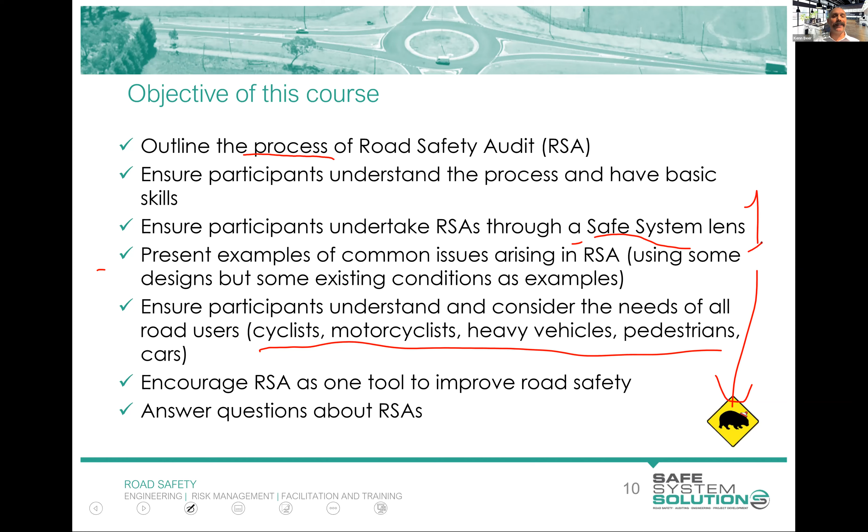The road safety audit process really follows the Austroads Guide to Road Safety Part 6 and 6A, which set out the process for managing road safety audits (Part 6) and the implementation of road safety audits (Part 6A). Those documents are currently being updated. I'm acting as a technical advisor to Austroads on that update to consolidate them into one, and I'll give you some insights into things coming in that future document, which should be released later this calendar year, hopefully, although Austroads board approval tends to be notoriously slow.

New Zealand has this document, a 2013 document, Road Safety Audit Procedures for Projects. There's a lot of similarity between these two. There are some differences - some New Zealand practices have been fed into the new updated Austroads Guide, and there will be some differences. It'll be up to New Zealand to decide whether you adopt the new Part 6 in its entirety, or create a supplement with your own practices mentioning specific aspects you want to do differently. Those are the old Austroads guides, which you may recognise.

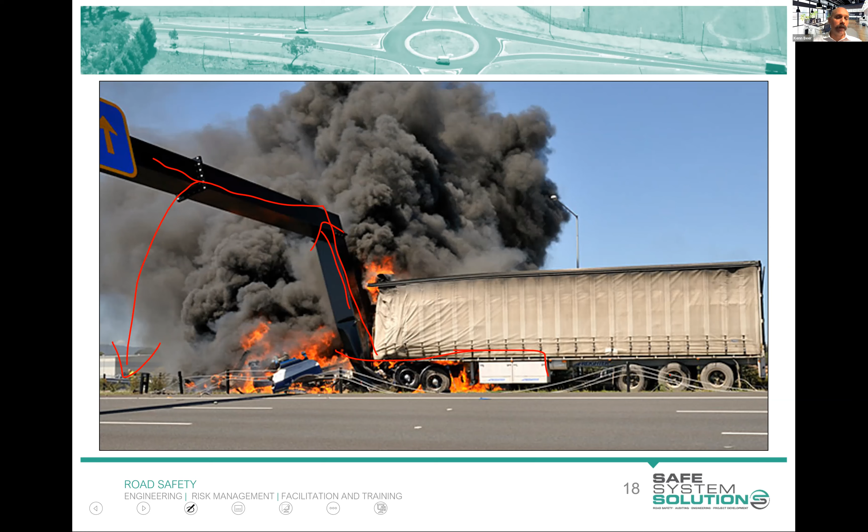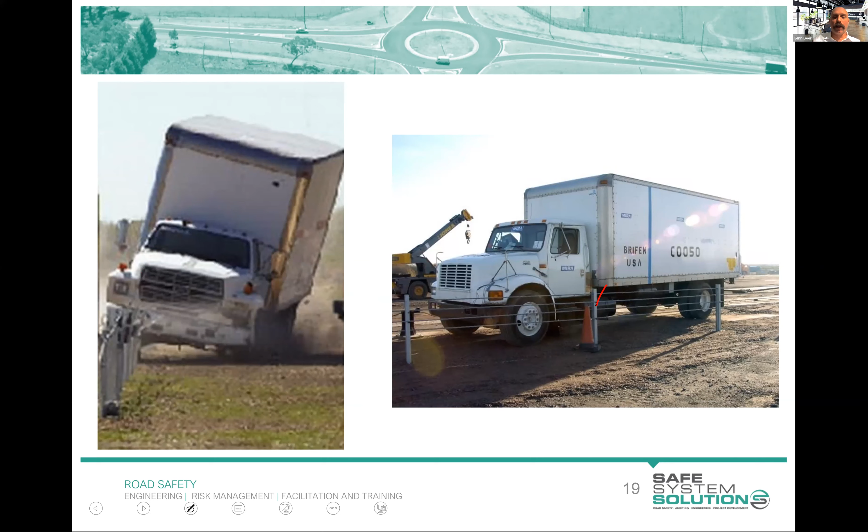Before I get you involved in a few other questions and polls, I want to run through another classic example of a road safety audit issue that would pop up. That last one - there's lots of stuff associated with road safety barriers if you're doing a barrier job, and many of you will know there are so many technical elements to road safety barriers. Auditors do delve into that a bit more than you would with a safe system assessment, where you're looking more at a higher level at everything.

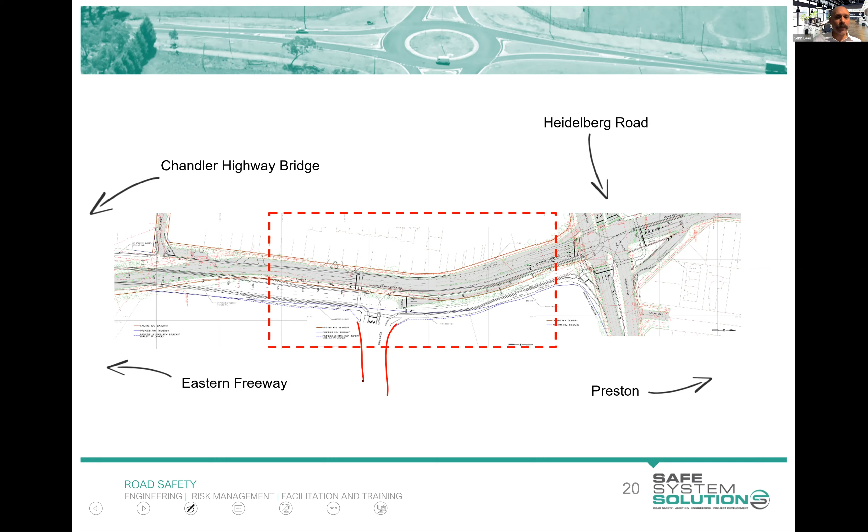Let's have a look at this one, which I would say is a classic road safety audit finding. We've got a design here for a new bit of road - a brownfield site. There's existing road there, there's a big new development coming in, a massive new development, there's some upgrades to this existing intersection, and it's all linking together. Here's the access to the new huge subdivision, and then it links up to this new intersection up here.

I sometimes marvel at people's ability to name some of these things. Trap lane - it's just such a great name to explain exactly what happens. You are trapped. You're driving along, you find yourself trapped, and maneuvers need to be made. We know if you have a trap lane, as a driver approaches it, they are going to make high-risk maneuvers to get out of their lane. Obviously they don't want to stop, and we know there's an increase in turbulence and an increase in crashes - a lot of sideswipe rear-end crashes, which can happen at higher speeds. But motorcyclists are involved in this too.

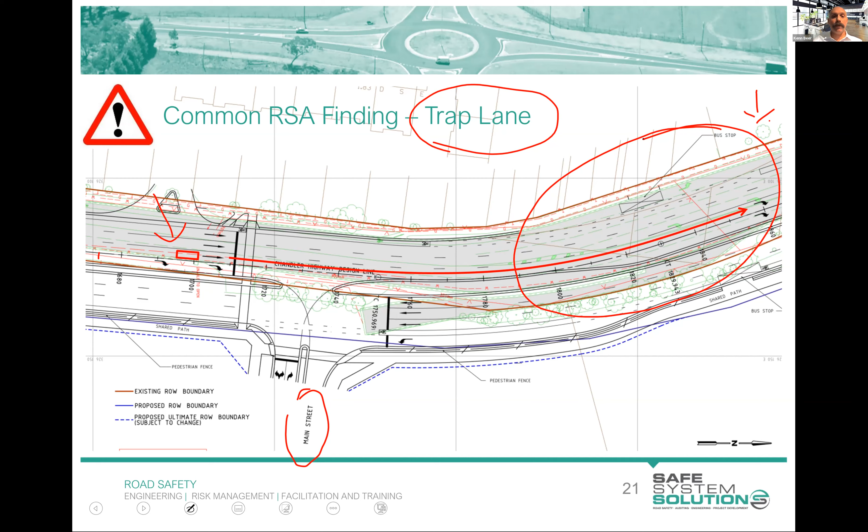So let's do a little exercise now, and I'm going to play a video, and hopefully it streams well for you. It might stream a little bit slow, but it's of a crash. I'm going to be asking you to identify characteristics of the road environment that you believe may have contributed to this crash.

Now, Kathy, hopefully that streamed through for you. Let me know if it streamed through. It was all good. Okay.

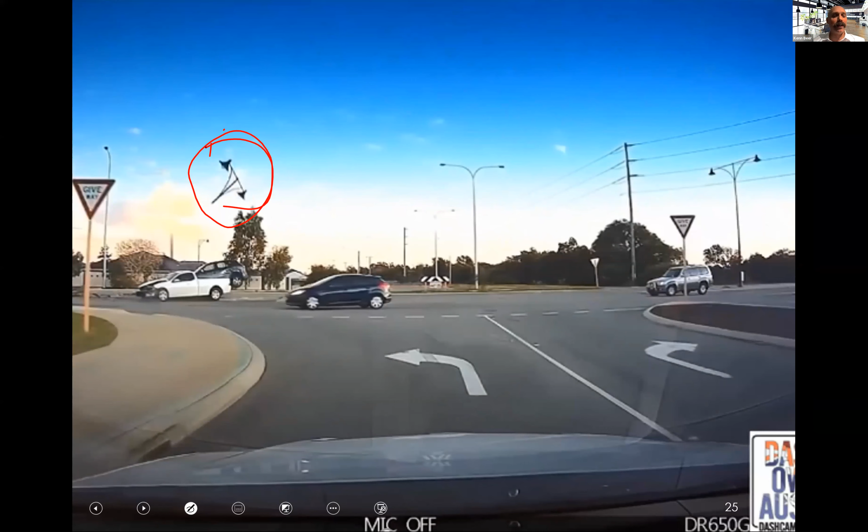I tell you what, though, I've never seen a slip-based pole where the light head separates like that. I'd be interested if anybody else has. It's quite a fascinating one.

Anyway, so the decision to utilize a frangible slip-based pole in this particular scenario, I think, has probably saved the life, if not prevented a serious injury, of the black car driver there, who was just driving along and then all of a sudden was involved in an incident. So that choice to use that means it's got that extra deflection space there.

And it's surprising how small a distance, if you can add that energy absorption or dissipation of energy over time, can change it from a fatality, high-level serious injury, into a walk-away event—which this one, if you watch a little bit of the footage after, you see that actually they get out there.

So a road safety auditor also has to think about severity of crashes. We don't just stop at likelihood, we do the severity as well. So another example here where maybe a road safety auditor has been involved and made the recommendation to use a slip-based pole.

So likelihood and severity, again, are key elements to thinking through the road safety audit process.

So let's talk about slip-based poles. A slip-based pole, I'm sure this group is very experienced with, though some doing this course in the future may be new to it. It's the idea that it shears at the base, where it has the collar and the bolts to manage wind loads from a torque perspective. As a road safety auditor, you'd be looking at roadside lighting installations and saying, well, could this be made slip-based to lessen the severity of any crash?

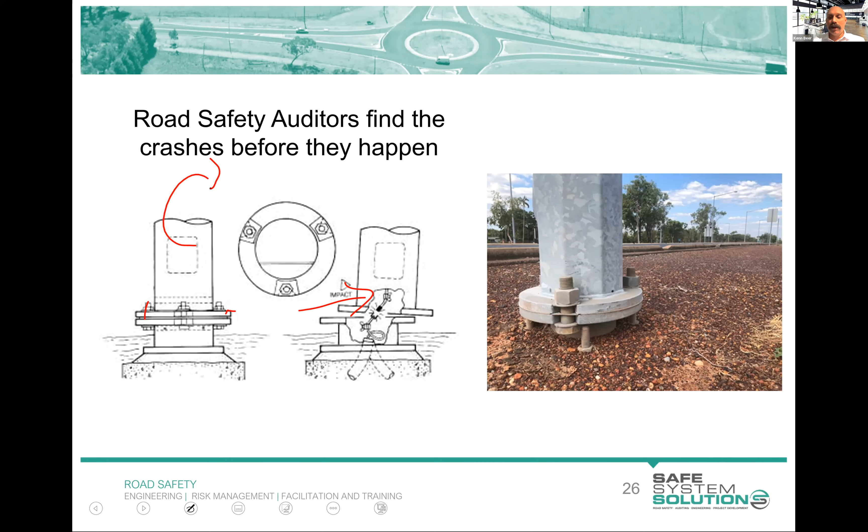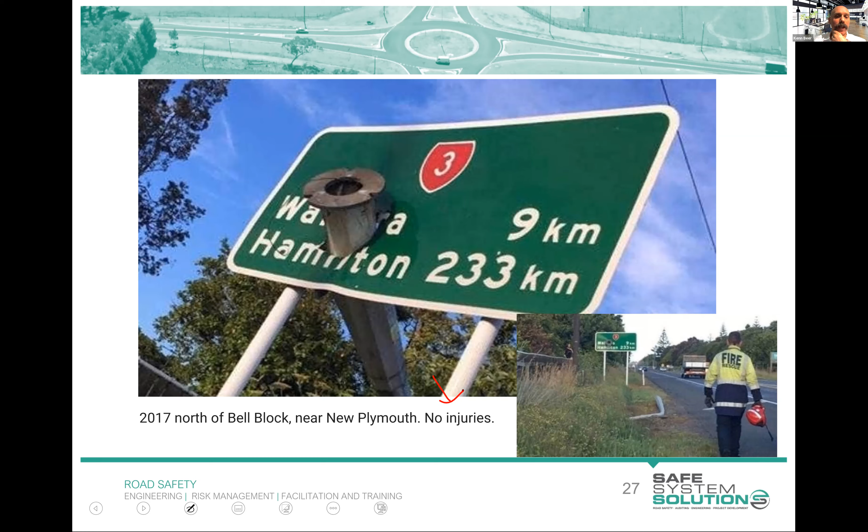So that shows the advantage of using slip-based poles when we can. But as a road safety auditor, you've got more to do than just suggest slip-based poles everywhere. You have to contextually think about this and understand how it's going to function if struck. What are some of the challenges with it? Are they using the right post, the right pole for the right location?

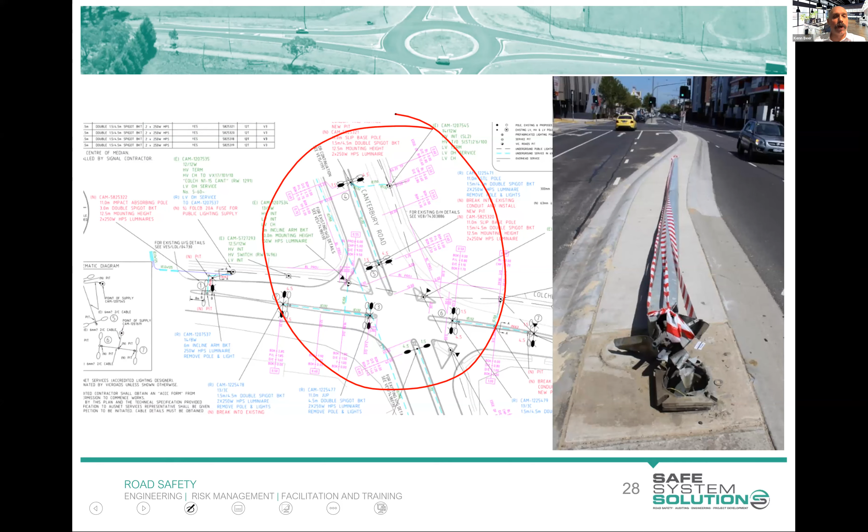So let's have a look at this one here. Hypothetically, if it is the same location, it's not quite the same pole. But if you were back at the design stage, seeing lots of lighting columns and poles in this big new major intersection upgrade, and they said we're going to make this a slip-based pole, as a road safety auditor you'd say, well, that's good - they're trying to make it safe and friendly. But what issues may this arise that you'd want to put into your report? Any ideas on that?

Okay, yes, they're all coming in now. I'll let Kathy work that out, because the flood of people talking about pedestrians and vulnerable road users is big there, and that's right. We're starting to think about, okay, if this is struck, maybe even at lowish speeds, we're going to have a large hazard falling into areas where there's pedestrians, cyclists, and also overhead wires - lots of overhead wires here.

So as an auditor, you need to think through all of these things. Where is it? When it's struck, where's it going to go? Is it more dangerous to have it slip-based rather than rigid, or even an impact-absorbing pole, which holds a more contained envelope when struck and is usually the preferred frangible light pole in a lower speed environment? Lower speed is generally seen as anything below 80 kilometers per hour in a lot of your standards and guidelines. 80 is very fast, as many of you know, and there's a lot of energy in there, but generally speaking.

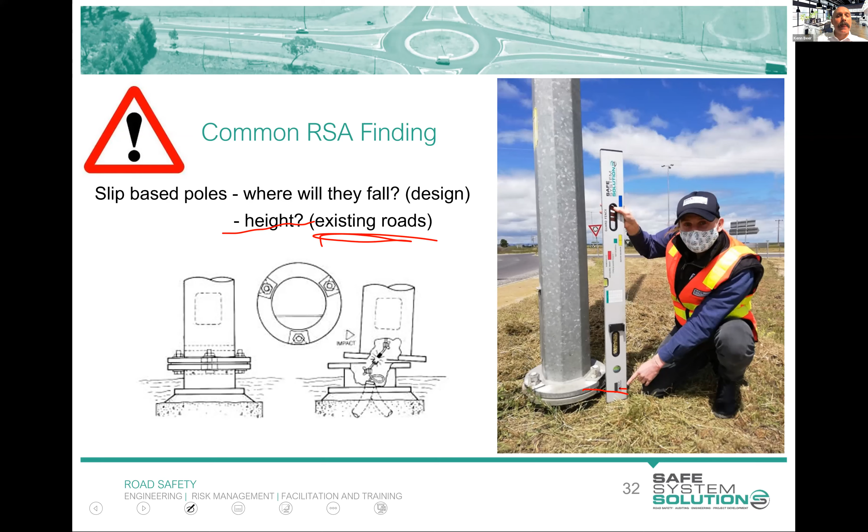So road safety audit is proactive. It is the proactive process. Black spot investigation, crash reduction study - I think was the term I was looking for in New Zealand - is sort of the black spot investigation, crash reduction study, road safety assessment, or whatever it is the reactive process.

Now the question sort of comes: should you look at crash history as part of your road safety audit? And there is no specific advice. In fact, your New Zealand procedure for road safety audits does mention crash history as something you could take into account more in the determination of your likelihood of crashes, but certainly it is identified.

A lot of road safety auditors will say they don't like to look at crash history because this is a new facility being built. It's a design, it's a major alteration to the infrastructure. And the history of it is somewhat irrelevant, and it may cloud your thinking broadly about potential future issues.

So I'm not going to say you must look at the crash history or you must not look at the crash history. I'm going to leave that to you. If you think it's going to be valuable in building a rounded picture of what's to come, then please do so. If you think it will help you risk rate things, please have a look at it. If you're worried about it clouding your judgment, you can maybe put it to a side, or maybe look at it after you've done a bit of thinking about the project.

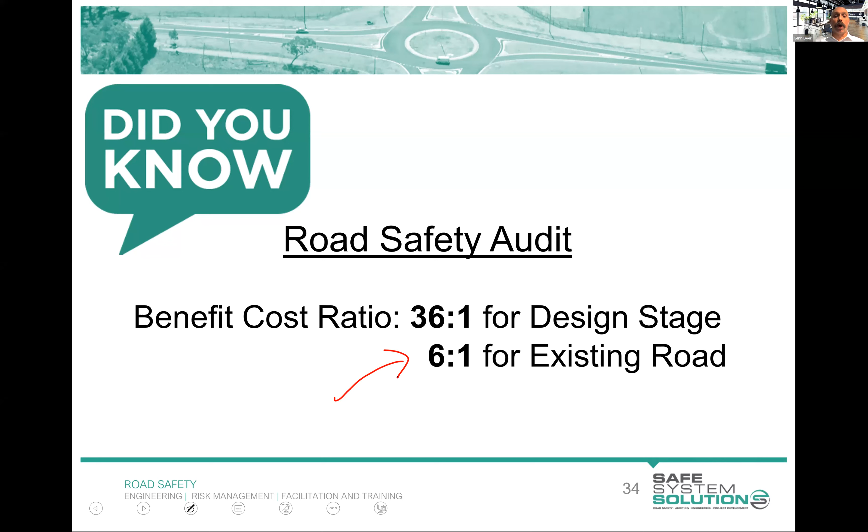Okay, definition of a road safety audit. I'm going to run through this for what the Austroads definition is, then show you what the New Zealand one is. They're pretty much the same, but there's some slight differences.

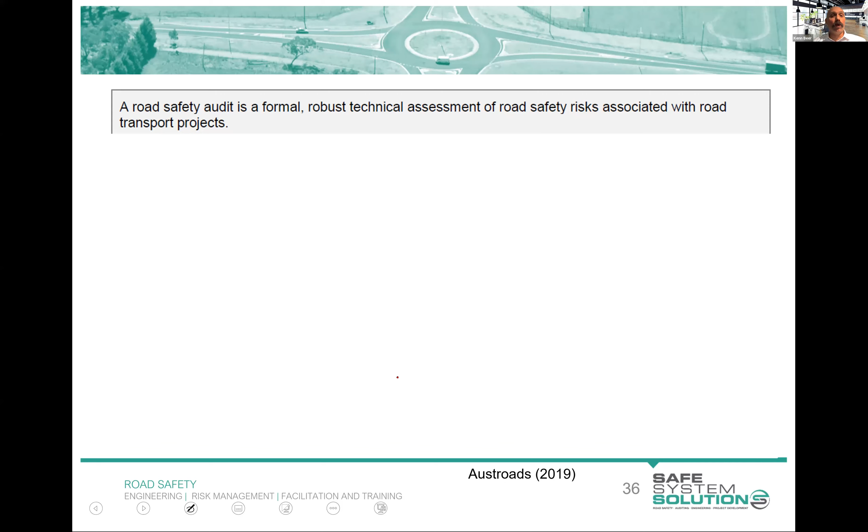Austroads has come up with this lengthy, wordy definition of a road safety audit: a formal, robust technical assessment of road safety risk associated with road transport projects, completed by independent and qualified audit teams, applying safe system principles and targeting fatal and serious injury crashes. It considers the safety of all road users, unless specified in the audit brief, which I'll come back to.

Actually, that one is a potential trip-up point for the quiz at the end, because we always say you should consider every road user within a road safety audit. But there are some briefs which specify a particular road user as a focal point, though you still wouldn't ignore other road users. So when you get to that question, really think: we've got to consider every road user here.

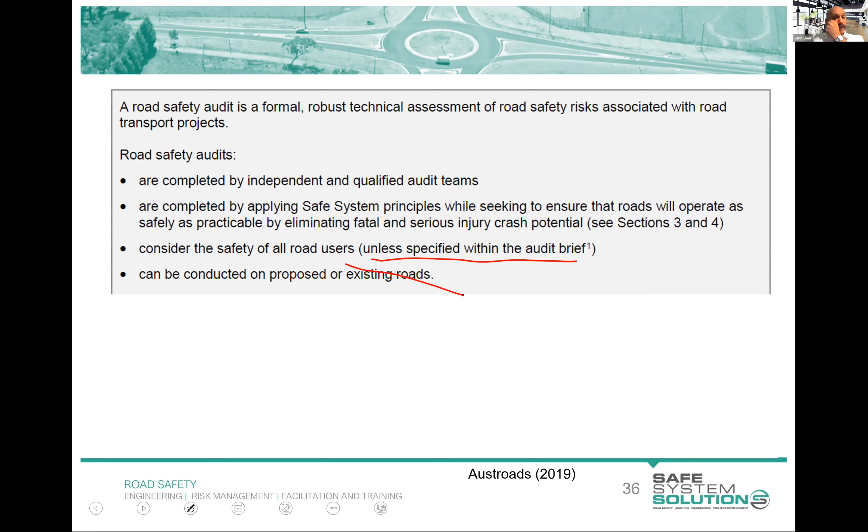And it can be conducted on proposed or existing roads. Again, this is one where New Zealand will say, no, that's another process. Then there's this extra statement added into the Austroads definition.

The objective of a road safety audit is to identify foreseeable hazards for road users. It's a reasonable but not absolute hazard identification method for all road users, with a particular focus on reducing fatal and serious injury crashes. A road safety audit is not an opportunity to redesign the project without an apparent link to safety. So it's all about safety.

And it's not a technical check against design standards. That sort of work should be carried out as part of quality processes within any design house or design organisation.

So it's formal — I'll highlight that. This is a formal process, and I'm going to take you through all the steps of it. It's not something that just happens at lunchtime, or that you flick over to a colleague saying, hey, can you audit these designs and have it back to me in a couple of hours. There's a process to go through: done by independent and qualified teams, using safe system principles, considering all road users, on proposed or existing roads.

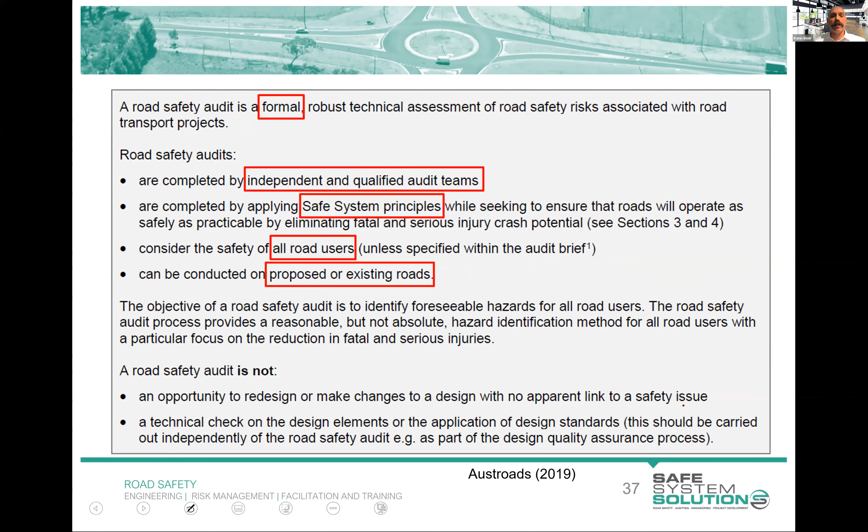The New Zealand definition seems to say it with far fewer words than Austroads — maybe Austroads just likes to elaborate a little too much. It's an independent review of a future road project to identify anything that may affect road safety. The audit team considers the safety of all road users and qualitatively reports on road safety issues and opportunities to improve safety. It's intended to help deliver a safe road system and is not a review of compliance with standards. So a lot of familiar themes there, and I highlighted a few important words.

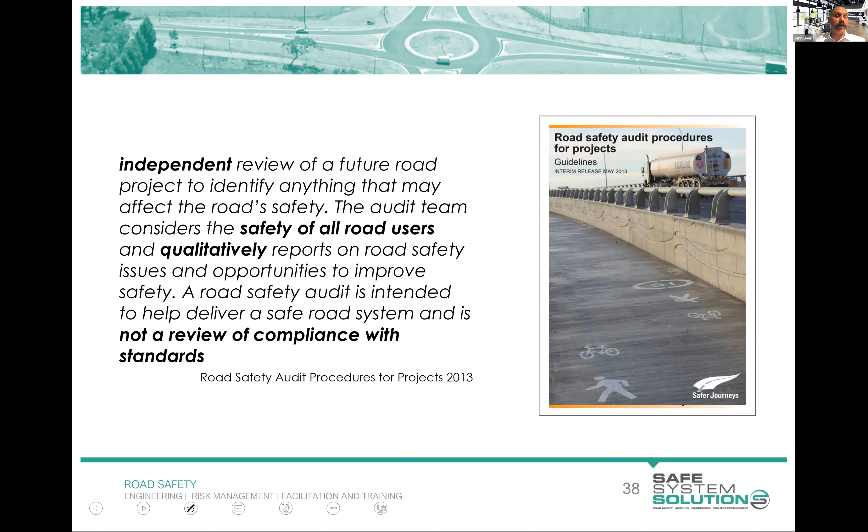The safe system, as I've mentioned, is increasingly factoring into road safety audits, and New Zealand's got an interesting way of forcing that out through the risk assessment methodology used, which we'll go into.

This is the part of the course where I remind people what the safe system is, or introduce them to it for the first time. We do get a lot of people through this course who really aren't aware of the safe system, so I spend longer with a group like that.

But this group has already been through all this, so I don't need to run through all the principles and elements New Zealand is using under the new strategy and framework of the safe system. Still, human tolerance to physical force and the idea that people make mistakes remain critical to it.

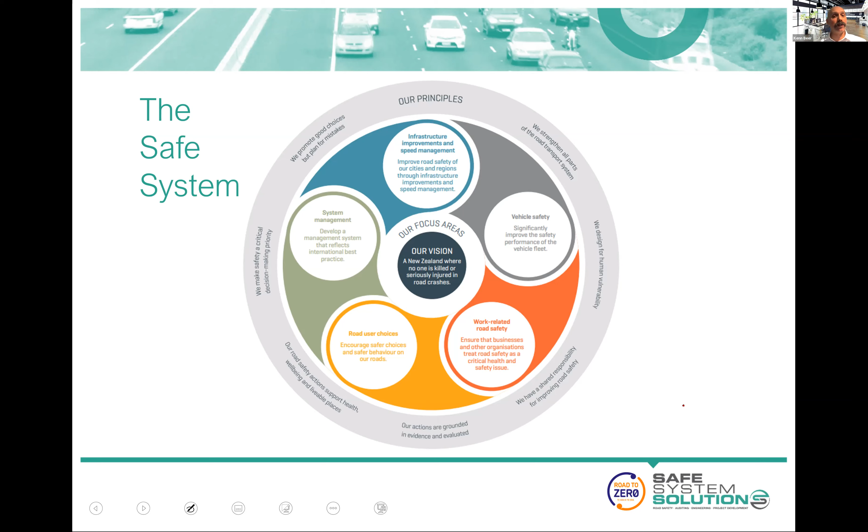Normally I'd run through all the different New Zealand principles being put forward, but really, highlighting designing for human vulnerability is an important one that people can forget in road safety auditing — getting fixated on likelihood factors, but we need to consider vulnerability as well.

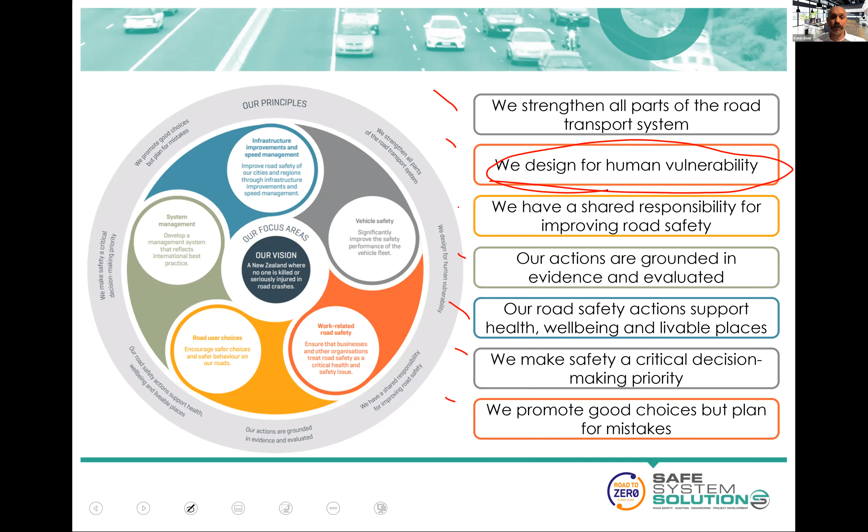We also utilise the biomechanical tolerance forces of the human body, referring back to our curves on speeds and crashes. I know there's lots of work going on recreating more contemporary versions of these with newer vehicles and better data and information, but the Austroads Guide and the New Zealand one still refer to these curves.

It's probably at this point we're going to pop up a little poll. I've asked one of these questions before, but I'll ask it again because it shows what we'd ask a fresh group — it's my way of talking about human tolerance to physical force.

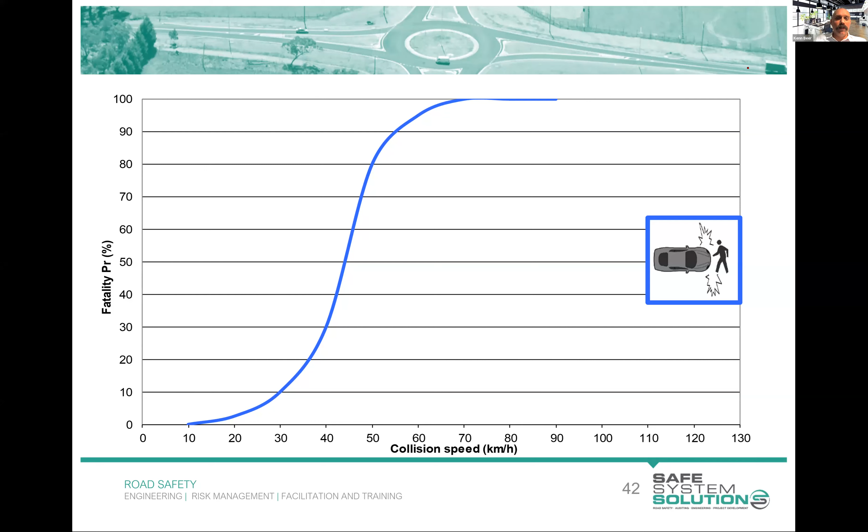Road safety audit, check against standards - no, it's not, well done everybody. And you can audit your own design - well, you can't audit your own design. It has to be that independent check, and most of you are onto that.

So the formal elements of the SAFE system - these are more across Australia these days, New Zealand's sort of drifting away from these pillars, these elements. The idea being that safe attitude's not specifically one of the elements of the SAFE system; it's embedded within safe people, I suppose. And the idea of eliminating mistakes on the road is seen as unachievable - we've got humans in control of the systems, humans make mistakes, so that's not specifically one of the things within the SAFE system.

It's more about minimising and managing mistakes rather than trying to eliminate them. And Usain Bolt was 44 kilometres an hour, as most of you got, and that brings us back to the graphs on biomechanical tolerances to forces. We see the car striking pedestrian graph here, and this is where, as you remember from the last course, we have Usain Bolt coming in at around 44 kilometres per hour in the collision speed down the bottom here. For the general population, we're seeing that level is about 60% chance of death if a car was to strike a pedestrian.

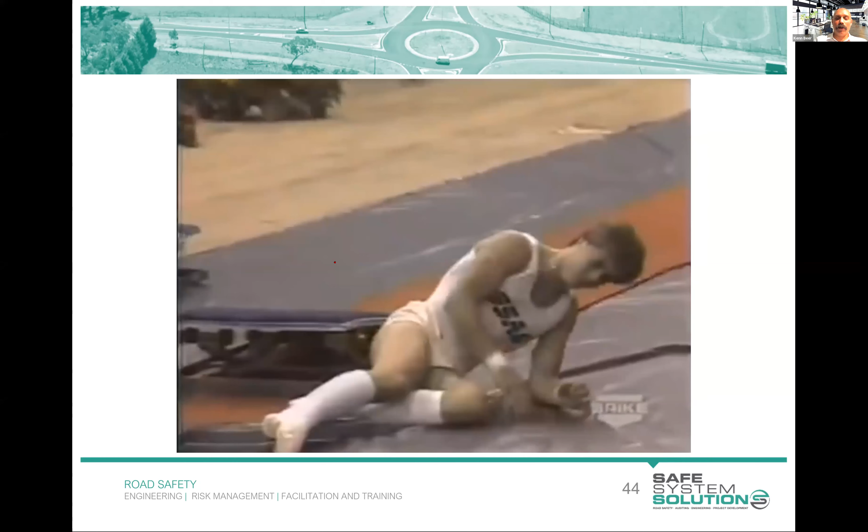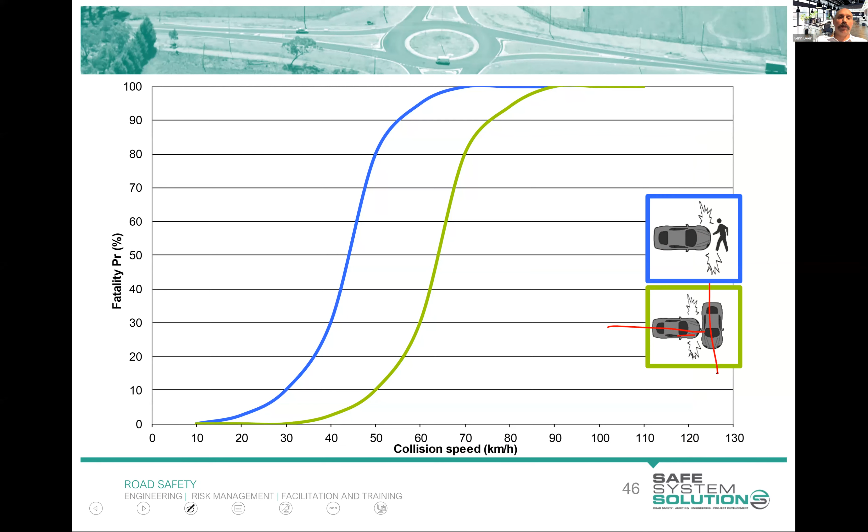So when we put speeds higher than the human body can handle into different crash forces, we are in trouble. This is the side impact, right angle, bullet vehicle speed here, and again the head-on speed. I would spend a lot more time running through this, talking about the biomechanical tolerances of the human body, what this means, where there's exponential kick-ups - 30, 50, 70 being the critical speeds for these different crash types. Also talking about other crash types like side swipes, crashes with poles, and the fact that you can dissipate energy over time. You can really start to think about these as vectors and get some understanding of energy transfer to the human.

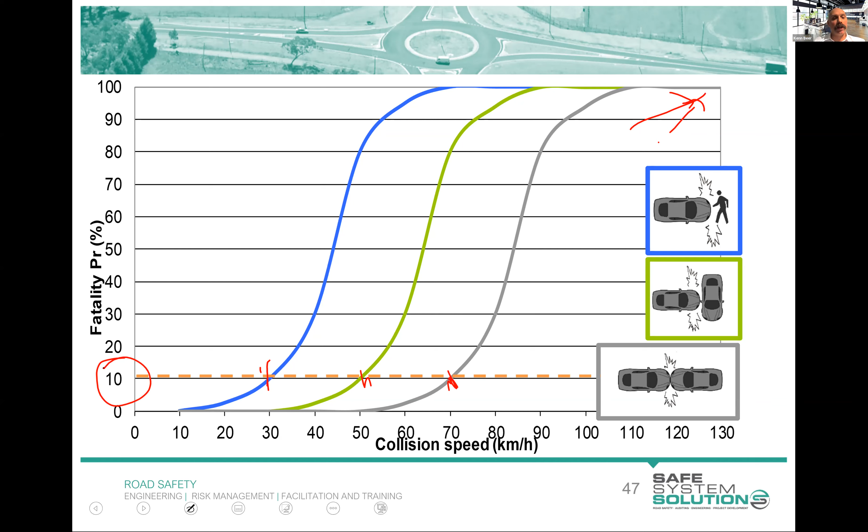The 10% line is still important in our thinking in road safety audits when we're looking into the severity of crashes or the chance that the crash will be highly severe. That gives us a good starting point, and some more speeds and crash types to give us that general idea of the severity and the outcomes of crashes when they occur.

Okay, the old model of road safety audits basically was to identify your issue - so look at the designs, identify the issue, put a risk rating to it, and make some recommendations. There's been a couple of new steps in recent years. The first one is to have a look at the biomechanical tolerances that we just looked at, make some commentary around that.

The next step is to categorize treatments into their effectiveness, similar to how you do in a safe system assessment. Neither of these steps are specified in the New Zealand guidance at the moment. They are in the Austroads guidance, and they'll be even further enhanced in the next version. So that might be an opportunity for New Zealand to take on some of this. Those are some of the elements that pull contemporary road safety audits closer to safe system assessments.

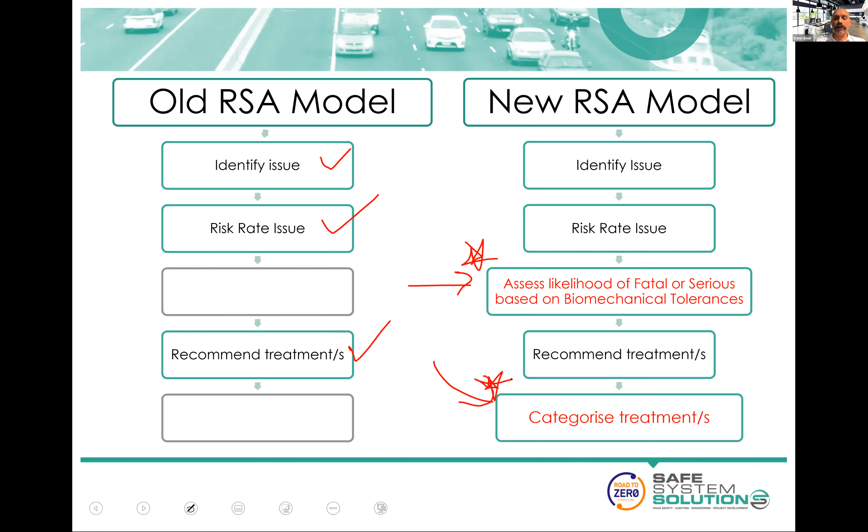So what I want to do is walk you through a road safety audit finding, and really focus on how you present the information to your client. The project team, the designer, said this is what we're planning at this intersection. You're the auditor, part of the audit team, poring over the design, looking at it, and then you found something. How do you present that information?

This is the upgrade of an intersection to install new traffic signals. You can see the green is the new design and the blue is the existing. They're putting in some signal pedestals, a JUMA, depending on how you pronounce it. I don't even know if in New Zealand you'd use that term, but if somebody can tell me what the acronym JUMA stands for, I'll give you a prize. We'll see if anybody comes in with that.

But anyway, you're the auditor, analysing, looking through. Okay, Mark is onto it. Oh, it's a race when many people know the answer — it's who can type quickest. Kathy, I'll let you work that out. I think Mark might have got in first, but John may have been close behind as well. It says joint use mast arm — that's where you put your signals and your lighting pole on the same pole.

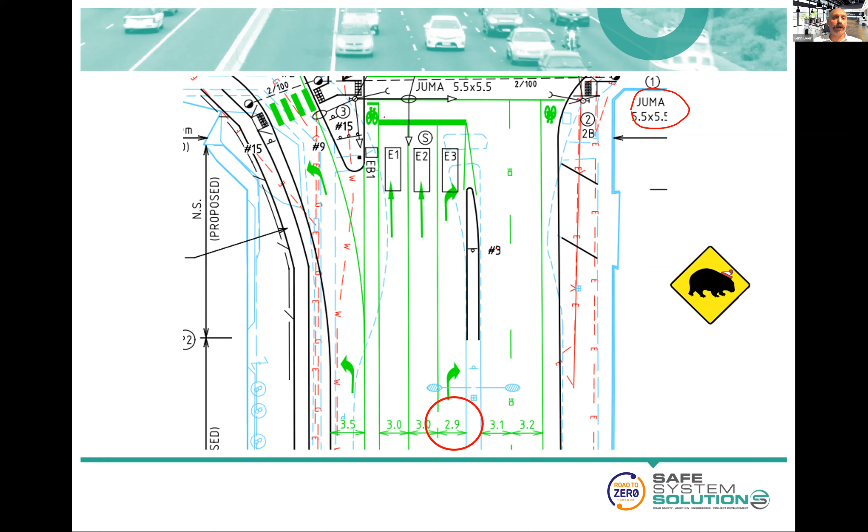So then you want to write up this audit finding. You found the issue, now you've got to explain it. 'Right turn bay is too narrow' — that is not going to provide your client with enough information. First, they'll be asking many questions: which right turn bay? What's too narrow?

Let's look at a fair example. 'Right turn bay from main road into side road is too narrow. The concern is it increases potential for side swipe or rear end crashes. Also, Austroads' road design guide sets the minimum traffic lane width of 3.3 metres.' Okay, we've got more information now — at least we know which right turn lane we're talking about, and we're starting to think about the crashes that could occur. Linking it back to a standard is absolutely appropriate to do in a road safety audit — not a check against standards, but if you've got standards and guidelines that back up your concern, you absolutely put that in.

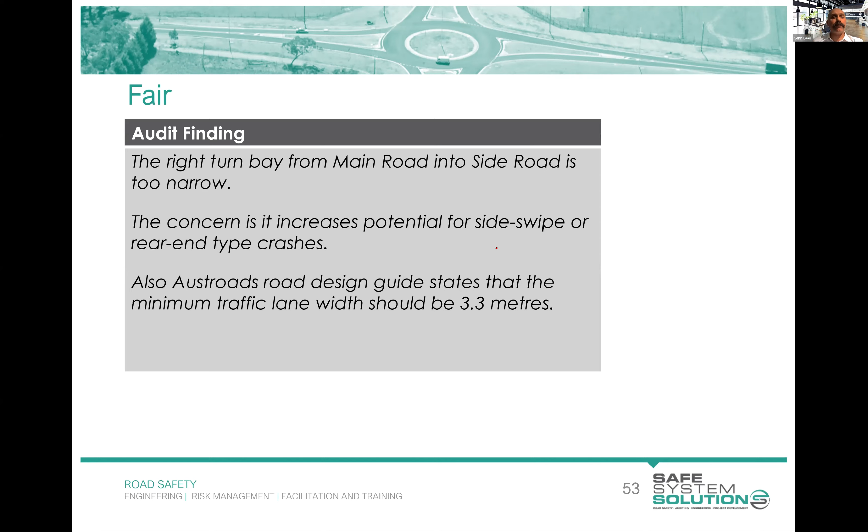And Austroads' guide specifies it should be at least 3.3 metres. So you can see there's a good bit of information.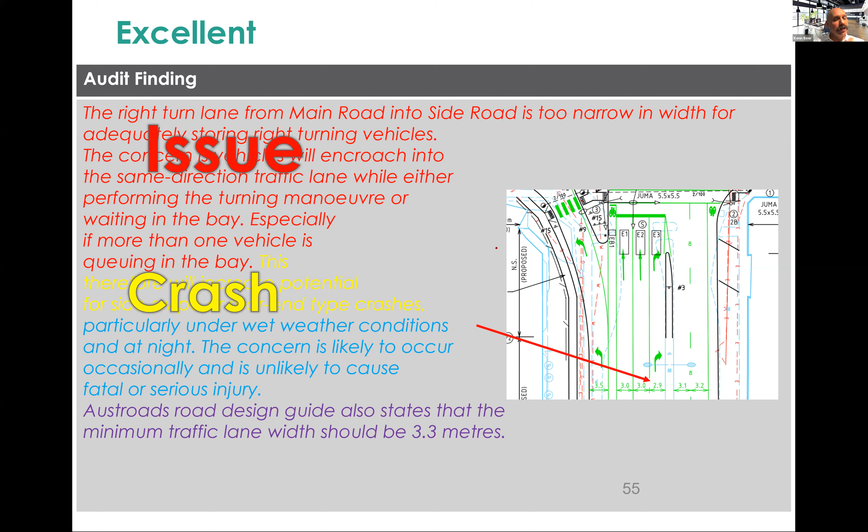The first one is the issue - you're explaining the issue you've identified. The yellow is the crash; you actually want to specify the crash that could happen. If you can't actually think of a specific crash that could happen as a result of this, it's probably not a road safety audit issue. So that's a good test: can I think of a crash that can happen if this is left as is and built as they've designed it?

Then the blue here is any extra risk factors - things that increase or decrease the risk of that issue you've identified. And finally, in purple at the bottom, standards and guidelines, if applicable.

This is where you refer it back. A lot of road safety audit issues involve not meeting standards and guidelines. The auditor identifies it as a road safety concern, and there's standards and guidelines to back it up - you put those two together and specify it. I just don't want anybody to feel that if it meets a standard, then it's all good; you've got to critically question that. Likewise, if it doesn't meet a standard, it's not necessarily bad. But do put it in there if you can.

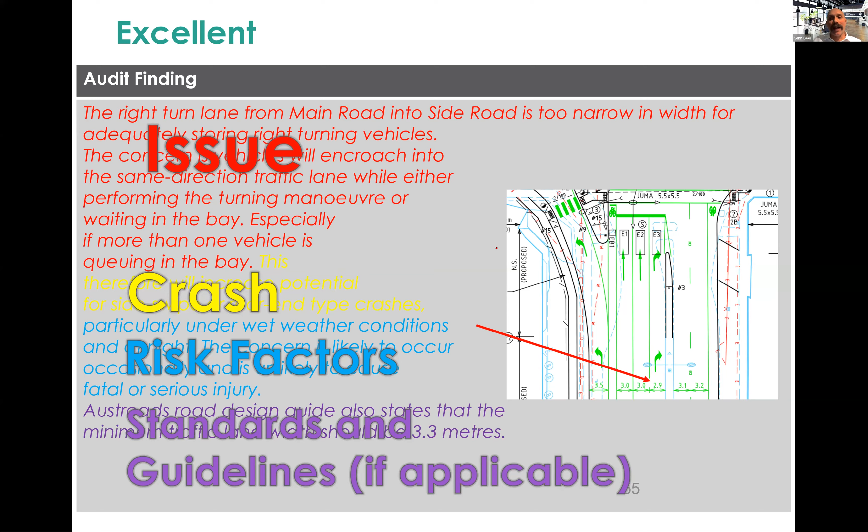So that was the little formula for writing up a road safety audit finding, and we will be asking you to do that in a fun way at the end of the next module, or the module after, I'm not sure. But hopefully you've got your 3D goggles in your pack already, so that's going to be fun.

Okay, just a quick question - can I jump in with a quick question? You've got 45 minutes. Do you think a safe system assessment could now replace the existing road safety audit? Yeah, yes, I do.

I've never been a fan of existing conditions road safety audits, ever, but especially now that we have a couple of things available to us. One being the Safe System Assessment Framework, which I far prefer, and the second being the wonderful tools available, such as iRAP - infrastructure risk rating - and your KiwiRAP crew there in New Zealand, just churning that out for your network. There are just wonderful tools to identify risk on the road network without leaving it to that particular luck of the draw of which auditor you get.

But what I do think is that those tools of a great risk rating methodology, combined hand in hand with a safe system assessment, and ensuring assessors go through that documented, is going to give you a brilliant outcome. Road safety audits could often give brilliant findings and outcomes, but sometimes auditors have a tendency to get fixated on a few minor issues and sometimes don't see the big picture the same way a safe system assessment just forces you to.

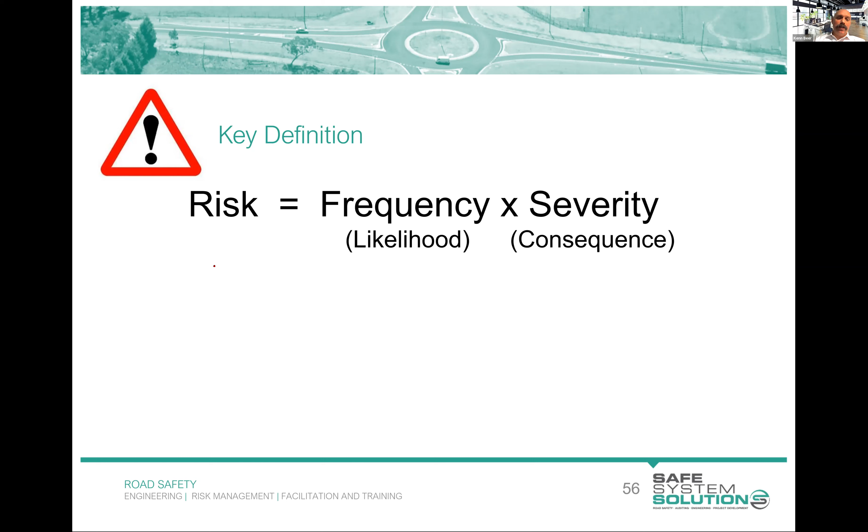Now, this is used then for us to identify risk in the road safety audit, and you give a risk rating to any issue that you identify.

And so what we see here is the risk matrix out of the New Zealand guidance. Now this is a beauty - I don't think I've seen people anywhere else in the world do it quite like this, and there's elements I really like about this. What you've got here is standard frequency of crash up the top - is it frequent, common, occasional, infrequent that the crash will occur?

The common way to do a risk matrix would then be to say, what's the severity of that crash going to be in terms of catastrophic, severe, minor, property damage only, or whatever it is. But New Zealand's done this tweak and utilised likelihood again - so the likelihood of death and serious injury. Basically saying that we're focused on death and serious injury, because that's what the safe system is all about eliminating.

So what's the chance that this crash is going to get up to that level? This is one that keeps me up at night pondering. Can you do likelihood times likelihood, or are you double counting likelihood here? I'm pretty comfortable with it as it sits, but it is a real head scratcher.

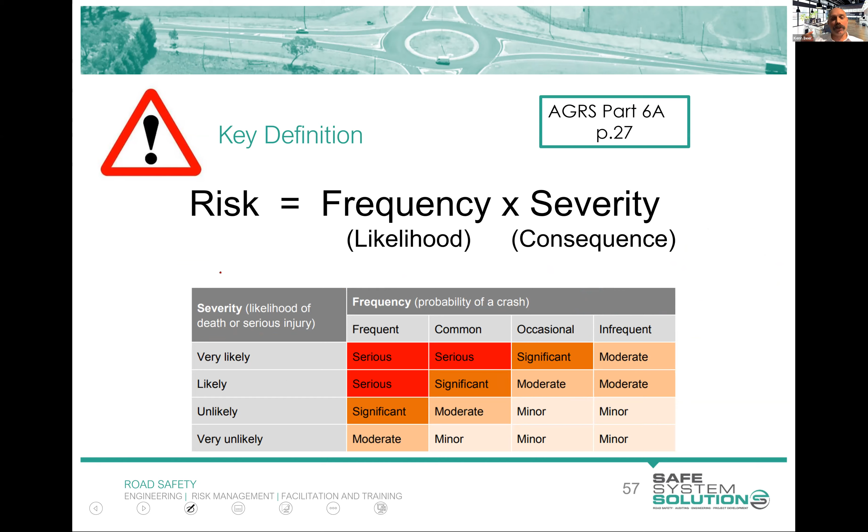Austroads does things slightly differently, but there's some clues that are going to help you determine where you sit on this risk matrix for a particular issue. On page 27 of the Guide to Road Safety Part 6A, there's the frequency, and it talks about frequent, probable, occasional, improbable - slightly different to the way New Zealand's termed it. They talk about frequent being once or more per week, that the crash is likely to happen as a result of this specific issue, all the way up to improbable - less often than once every 10 years.

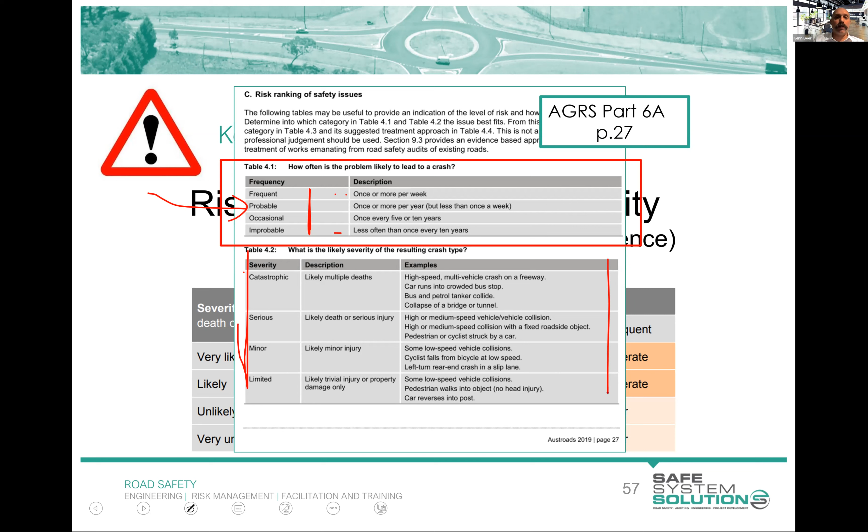Austroads then has different levels of severity, which New Zealand doesn't use. But in your guidance, it does talk about frequent being at least one per year - far less frequent than the Austroads definition - and once per 10 years being infrequent. Now, you don't get any more guidance than that in yours.

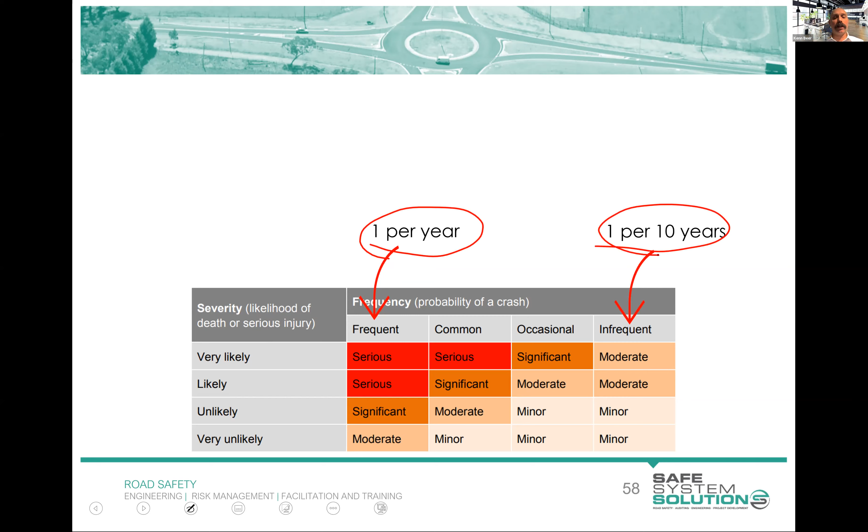So what this really means for road safety auditors in New Zealand is you're going to have to make some judgment calls based on these figures, maybe factoring in a little bit of what Austroads is saying. I'll pause there because I'm throwing out quite a few interesting elements.

So frequency and severity are not always known for sure, so there'll always be a likelihood of either - hence the New Zealand scale. Yes, I think that's part of the beauty of it.

There's quite a scale in the Austroads one, as Kevin's rightly pointed out, between these markers. So it's really going to take a little bit of judgment, and you do start to think about an overall risk score as a really important way of doing it.

What I find is across the board, road safety auditors, people new to road safety auditing, they over risk rate - it's always higher than people who have been doing it for a while. This group might be different because you're all in the space and have a bit more understanding of that. But let's talk about that.

You know, there was that shared path sign that blocked the give way sign. Once you see that as an issue, you have these visions of how it plays out to a severe crash.

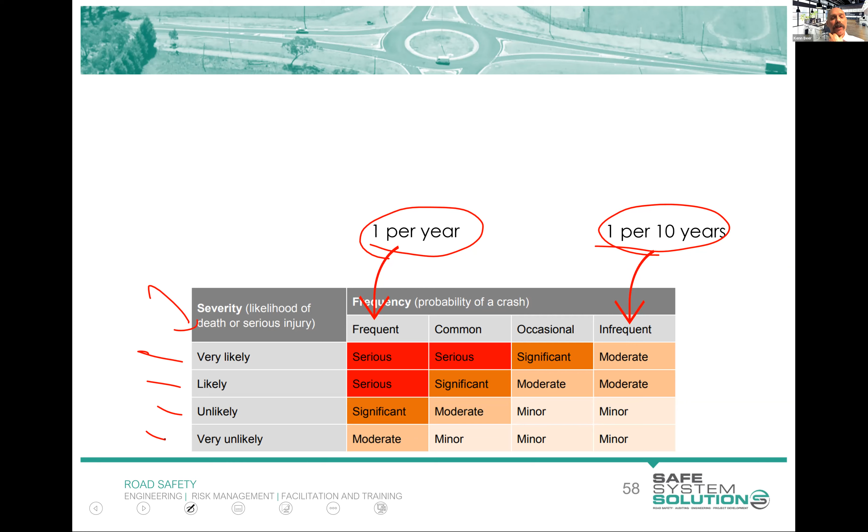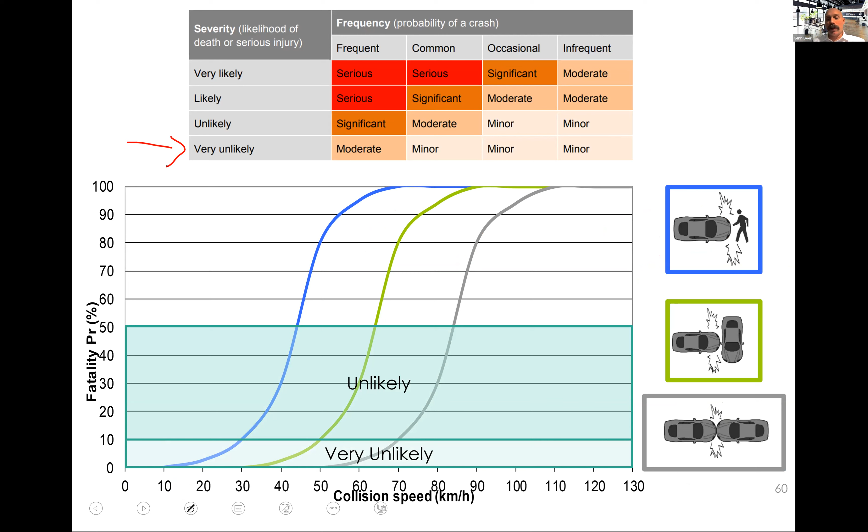And this one likely, hopefully these are coming up on your screen. Sorry, this one unlikely, this one likely, and this one very likely. So when you've identified the crash and the chance that it'll happen, you go back to some biomechanical tolerances and say, well, we know the speeds and the angles and the crash type fit into these bands, and this helps us a little bit in terms of the likelihood of death and serious injury.

So as I say, this is not specific guidance in the New Zealand guidance, it's just me writing how I would go about this. I have done this in a road safety audit in New Zealand at one point where we were just correlating it back to this as a means. So it's probably one I'd be interested in feedback from people on.

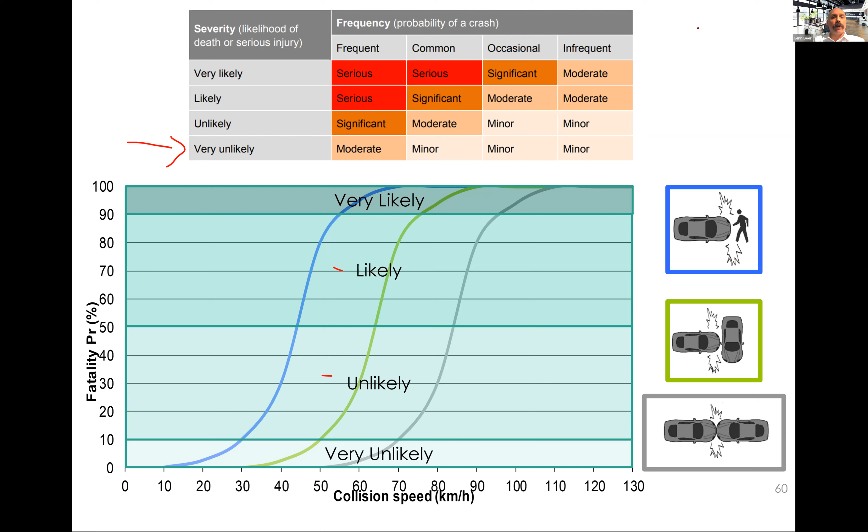This is what's not yet in use from Austroads, but this is one I developed with the project team, and we nutted this out for a while. It does take into account some of that New Zealand thinking, but it also conforms more with the international standard on risk, and it uses that 5x5 matrix, which a lot of people are comfortable with in risk rating.

So what we've got over here is likelihood, which includes exposure, and it specifies that. And we've got severity, of course, up here. What we then see is insignificant, minor, moderate, fatal, serious, some actual definitions of how you think about that - admitted to hospital being serious, death within 30 days being fatal. And down here we've got likely, possible, unlikely, rare - timing definitions, which are recalibrated to be more graduated rather than these big jumps. And frankly, the current Austroads guide has a missing section in there if anybody analyzes it in detail.

And then this line here is saying, really, these are our safe system tolerance - these are the ones we're most interested in. We pop an FSI, fatal serious injury - I think New Zealand would probably use KSI, killed seriously injured - next to them just saying, this risk is there. The reason that's important is because you can arrive at high risk down here, and you can arrive at high risk here. Now this one, to the right side of the crash forces, we're far more concerned about in a safe system outcome perspective than the minor crash with first aid. But it is an acknowledgement that that is still a high risk for lots of other injuries.

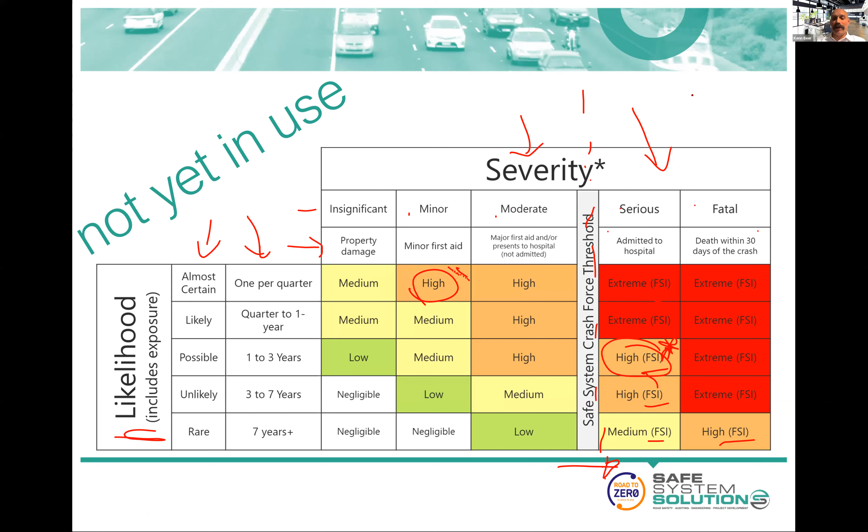Okay, some comments. Good for experienced auditors and smart clients, possibly a bit overwhelming for other clients. A fair comment, I think, there. There's a big section in the new Austroads guide about capability development, graduation of auditors, entering in as trainee auditors, auditing for a while, and then getting different status of auditors to try to accommodate this. But I do agree, there's a bit to it, there's a fair bit to it.

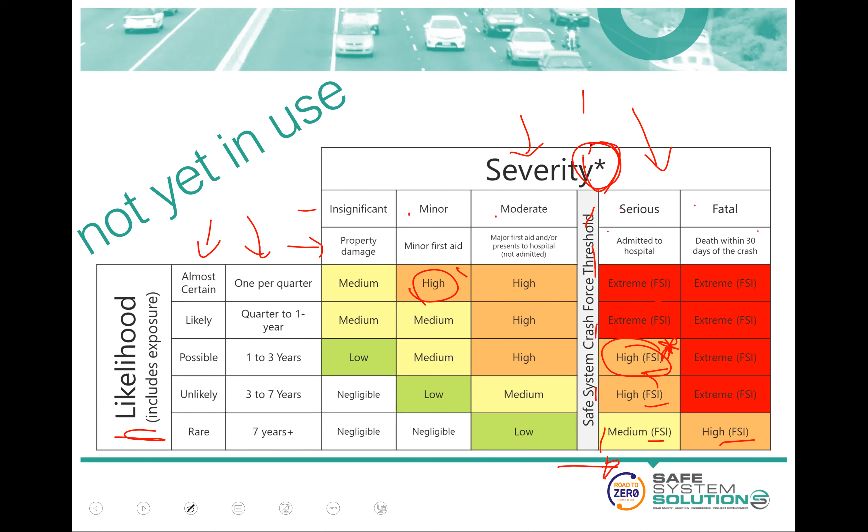There's actually this little star here because it references another table which gives more information about severity of crashes. Yes, and another comment just saying I like the visibility of the harm - admissions to hospital - which we don't seem to focus on in true safe system, i.e. post-crash care. Yeah, good.

And I think the other comment there is about clients receiving the report. That is something that is becoming more and more of a challenge, I think, where we're seeing a lot of road authorities out there who have de-skilled, and the auditors providing, or safe system assessors even, or even independent designers providing these reports, with some advice and trying to help your client understand those is really quite an exercise, and something that's going to be more and more important. We've got more and more responsibility to do that.

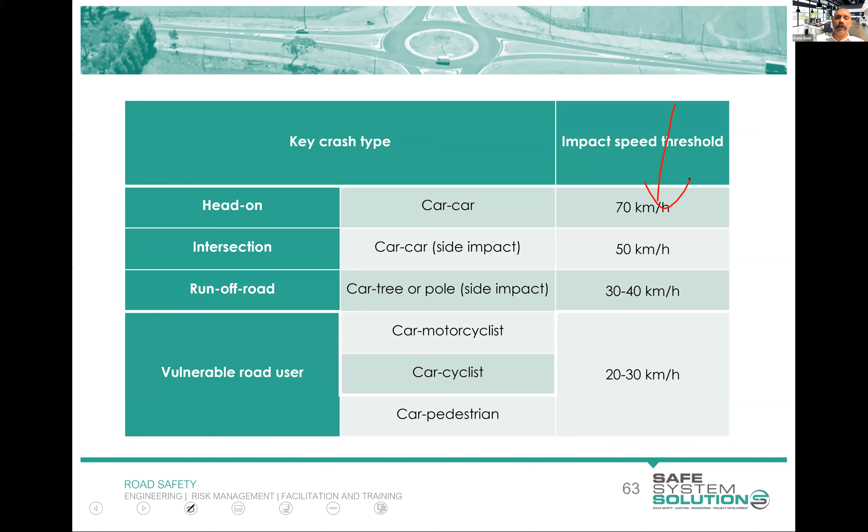So good point. But let's go back to this worked example we're working through. So you've identified your audit finding, and now you've risk rated it. Okay, and you've said, occasional, this is going to occur. It's going to be minor because it's side swipe, rear end, we're talking car to car, and so it pops out at a medium risk. Now you're going to risk rate it slightly different based on the New Zealand one, but you identify a level of risk. Of course, you're coming back to your tolerances to the human tolerance to physical force.

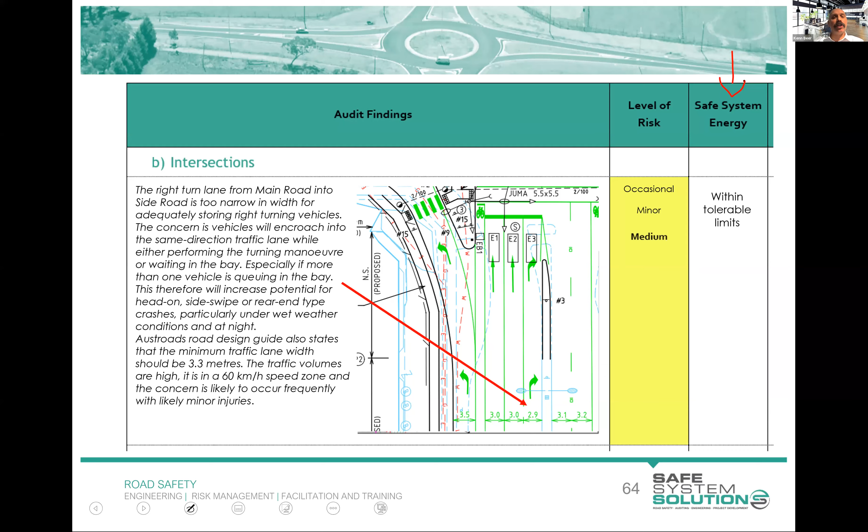And then you do make some recommendations, and all jurisdictions in Australia and New Zealand do recommendations except New South Wales. The New South Wales government has decided that nobody will be recommending to us what to do—we will decide what to do. Thank you very much. I think that will change shortly, because the auditors are certainly well placed to make recommendations or suggestions on what could be altered to improve the road safety outcomes.

Now, that is not to say that whoever receives the report must do that. They can accept it or not accept it, and they just need to justify why they're doing that, or doing something else, or they disagree. This is advice—it's advice to a project team. There's no legislative power with any of this.

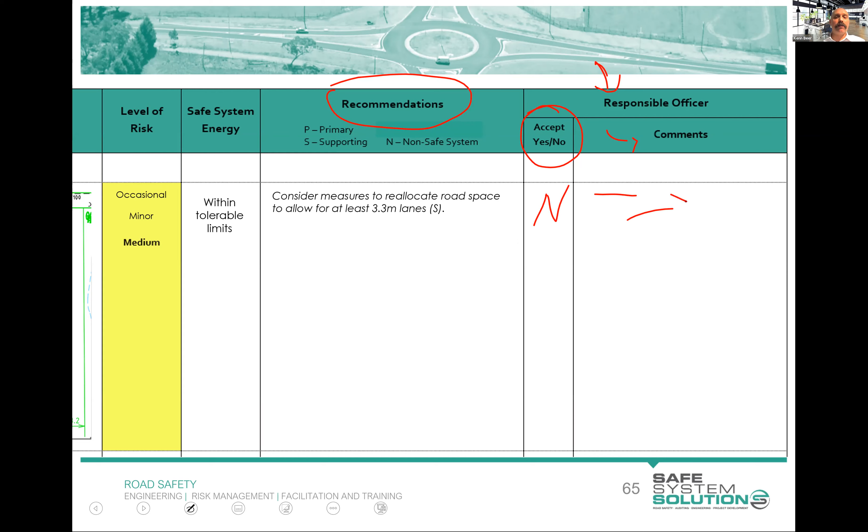It's an advice report. That being said, if you as a receiver of a road safety audit just accept or reject, and go 'no, not accepting that' without putting any information as to why, that's probably going to leave you open to some issues down the track if incidents were to occur. But you are well within your right to write some commentary here, saying 'don't accept that, and we're going to manage the risk in this way instead.' Sure, it's your project.

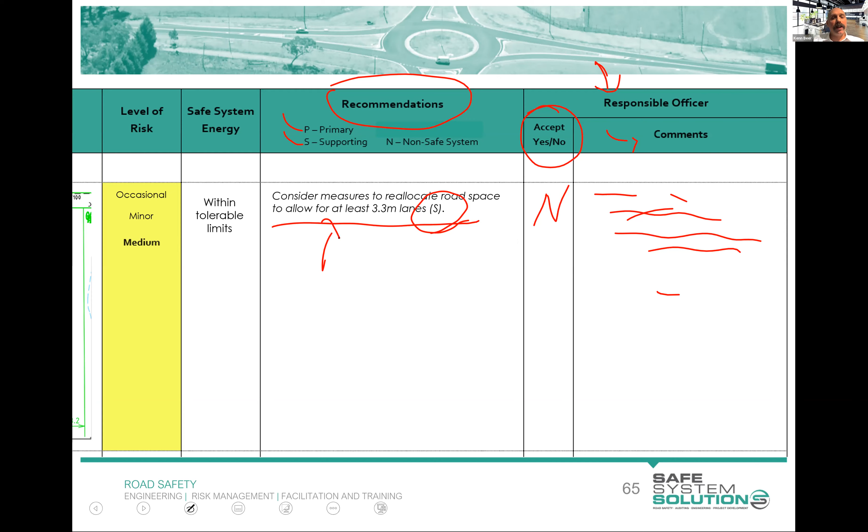But yeah, you put a recommendation in. Now, this is where there's some categorization of recommendations now integrated into a lot of road safety auditing, saying there's primary and supporting. Again, this is getting us closer to a safe system assessment, because we talk a lot about primary or supporting. So this one is saying: consider measures to reallocate road space to allow for at least a 3.3 metre lane—that's supporting. It doesn't eliminate the chance of a side swipe or rear end crash at all, it lessens the chance of it. It's supporting. Maybe you could provide some alternate ideas if they can't achieve that, but that's what it is. And here's a reminder of those definitions of those categorizations.

Primary treatment: road planning, design and management considerations that virtually eliminate the potential for fatal or serious injury occurring in association with the vehicle crash. Supporting: road planning, design and management considerations that improve the overall level of safety, but are not expected to virtually eliminate the potential for fatal and serious injury crashes occurring, and they don't do anything to negate any future primary treatments. The non-safe system is in there just as a definition for you—you would not be recommending anything that is a non-safe system, something that makes things worse.

So again, this is not New Zealand practice at the moment. I'm presenting it to show you some of the evolution of road safety auditing, and it might be something that you're involved in making alterations to, or want to see this sort of stuff out of road safety audit reports.

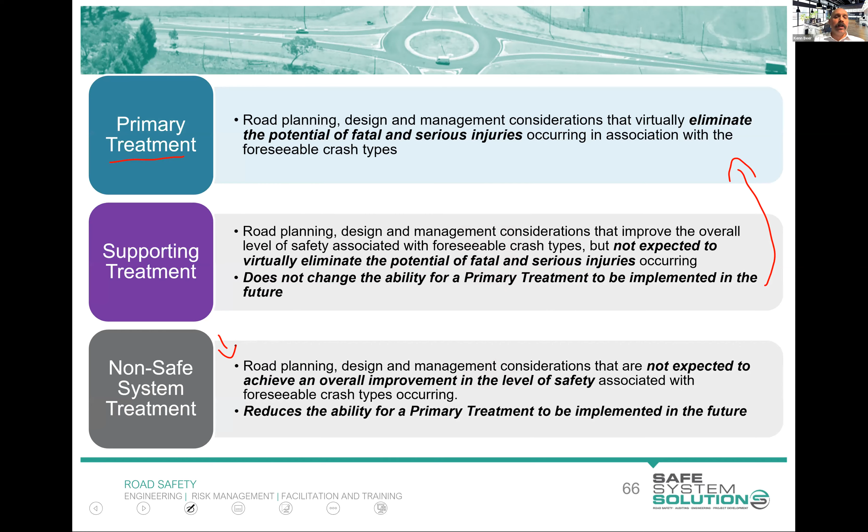Is there a tolerance speed for rear ends, similar to the head-on tolerance? Yeah, people have generally used the head-on tolerance as the rear end tolerance, from the Monash University Accident Research Centre kinetic energy management model, which used rear ends and head-ons as the two ends of the spectrum for all crash angles. There's more research showing rear ends carry serious injury risk at lower speeds than we've acknowledged with our biomechanical tolerances. So it's a watch-this-space situation. Sam Doecke from the Centre for Automotive Safety Research in Adelaide has good contemporary research on these crash forces. At the moment, as a rule of thumb, until updated Austroads guidance is published and agreed on, generally around 60 to 70 is probably the tolerance to think about.

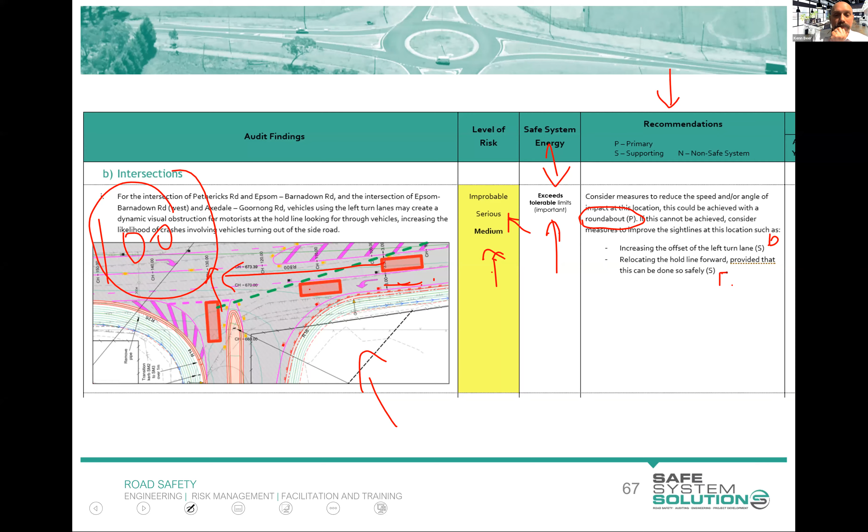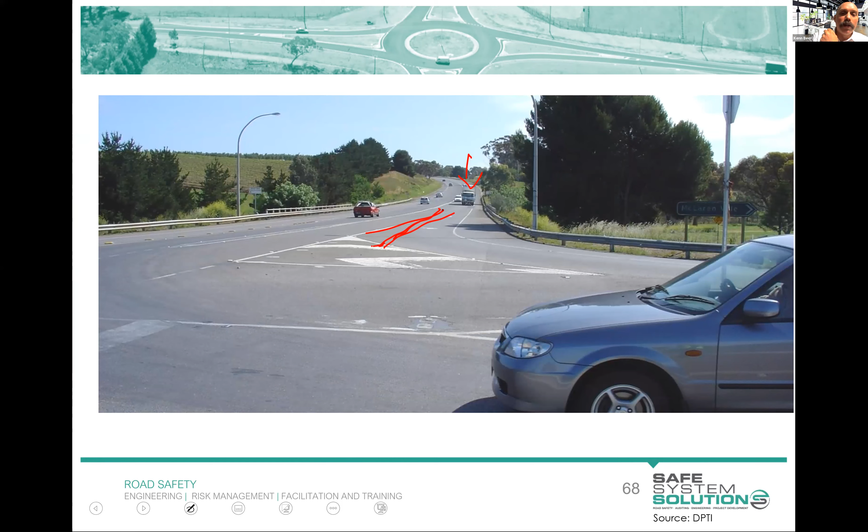This is a bit off topic, but I've been doing some work recently trying to get designs with larger separation at these points to open up sightlines. Ideally a big roundabout would give the greater aligned safe system outcome, but we're going to have a lot of scenarios where they're just not going to do that. So what can we do to get the best possible outcome in the interim?

Okay, questions there, Kathy?

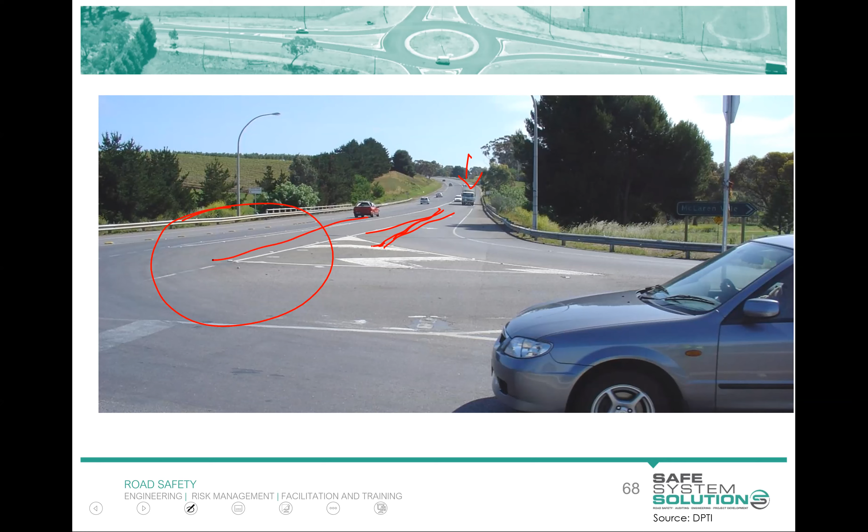I think there was a suggestion to remove the left turn lane. Yes, that's an option. There is a safety benefit to the left turn lane in terms of reduced rear end crashes, but you add this new dangerous one. The rear end crashes are traditionally less severe, especially if you've got forward momentum already for the vehicle you're rear ending. This is a very severe right angle crash, so that might be an option that is put forward.

Should you avoid saying if this cannot be achieved, and that should be up to the client? Yes, that's it. I suppose this one is trying to say that is what would be best, but as I say, if you cannot achieve this, here are some options which are lesser. But does it just give an easy go to the client to go, the roundabout, we'll just do the easiest, cheapest thing here? And I suppose that is a legitimate concern.

This particular one, we really knew they were hamstrung in a whole lot of ways, and most auditors probably wouldn't have even put the roundabout there. They would have gone straight to these things, but we did want to reinforce that that is what really needs to sort of come here, but these are your other options.

There's a comment from James saying we don't accept this issue on new intersections and insist on achieving SISD from the limit line. Yeah, safe intersection sight distance from the limit line. That is great. So you would be able to back that up with some particular New Zealand standards and guidelines. Unfortunately, a lot of jurisdictions aren't in that space.

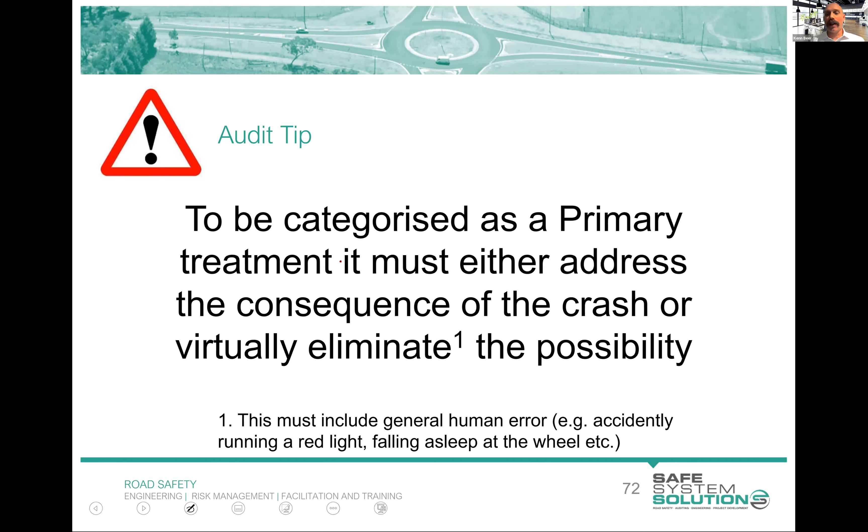Little tip in the categorization of treatments: primary really has to either address the consequence of the crash or virtually eliminate the possibility. And virtually eliminate has to take into account general human error and failure. So we're really into that space of addressing the consequence, the severity, and it's very hard to do that without managing speed at conflict points.

Just covering off a few things that a road safety audit is not. It's not another name for just a site inspection or a design check. It's not another name for a black spot or crash reduction study, and it's not a substitute for that. It's not an opportunity to fully redesign the project, especially where there's no link to safety. It's not a design review against standards - I can't say that enough. That may be part of it.

This is an important one: it's not really a method for prioritizing or ranking project options, and that's stated quite a few times in the Austroads Guide. That's where a safe system assessment is far better - that is great for ranking and prioritizing. So if you're asked, here's three designs, can you audit them and rank them? You say, well, that's not the purpose of the road safety audit. We will identify issues with each and give you recommendations on how to alter them.

It's not a safe system assessment. It's not a safety in design check, which is more about the construction, constructability, the maintenance, the maintainability, the decommissioning, and all of that of whatever the new asset is. So road safety auditors are really problem finders, and that is your primary role is to find issues. Helping solve those issues is just a bonus you give to your client. It's really up to them to resolve these.

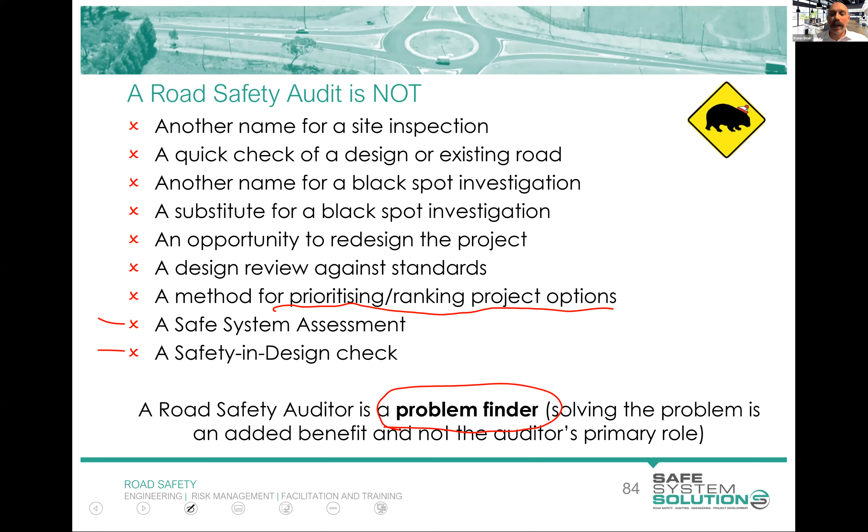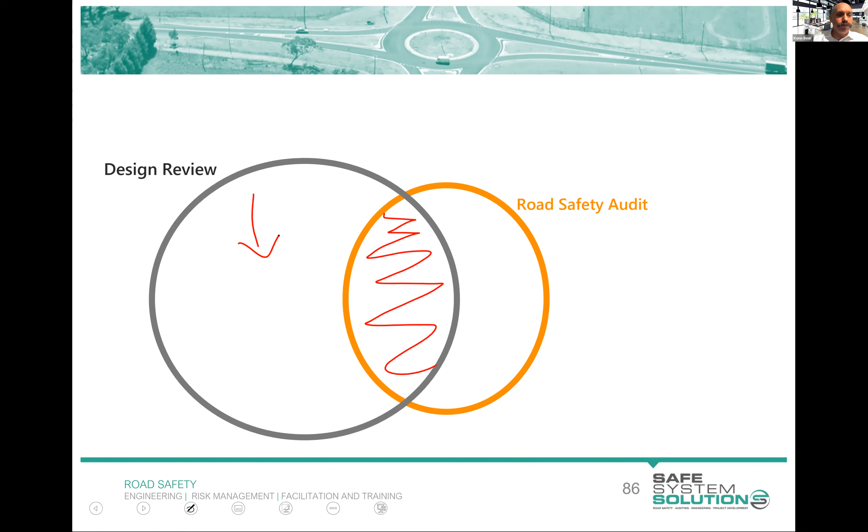Your job is to find them, but convention is to actually provide those recommendations, except for in New South Wales. I've shown this diagram before, but really we've got design reviews, and there is design review stuff you do in a road safety audit. They overlap, but they're doing stuff out here - looking at maybe drainage particulars, or property overhangs, or different things that may not have actual road safety specifics, but they're important design things. The audit and the safe system assessment does quite a bit of this stuff, depending on which stage. In here is a little bit more of that detailed stuff we've been talking about.

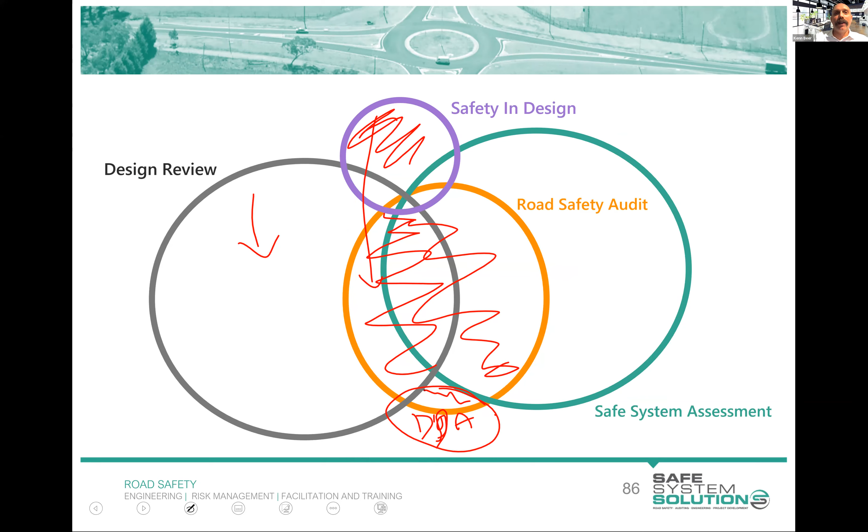Off-road shared paths are in there, you can see. The only one I've put a cross next to, which Austroads would say you can, is an existing road, because in New Zealand you don't do that for existing roads. But anything that interacts with the road environment, big projects, small projects.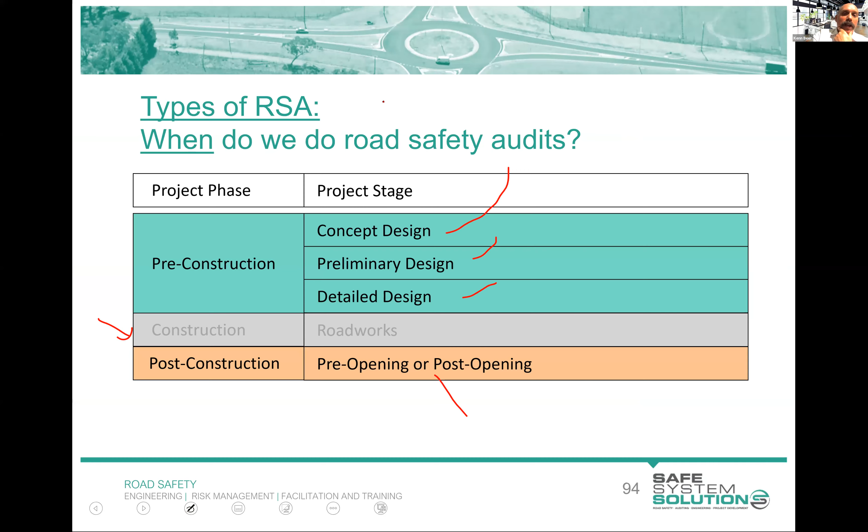The feasibility concept stage road safety audit, this is the one that I tend to say, do a safe system assessment instead - you're going to get better outcomes. But nonetheless, the feasibility one is big picture: big new bypass, and thinking about intersection form, alignment, what's the land use, how are people going to get from this subdivision over to the shops down here or whatever it is - big picture stuff.

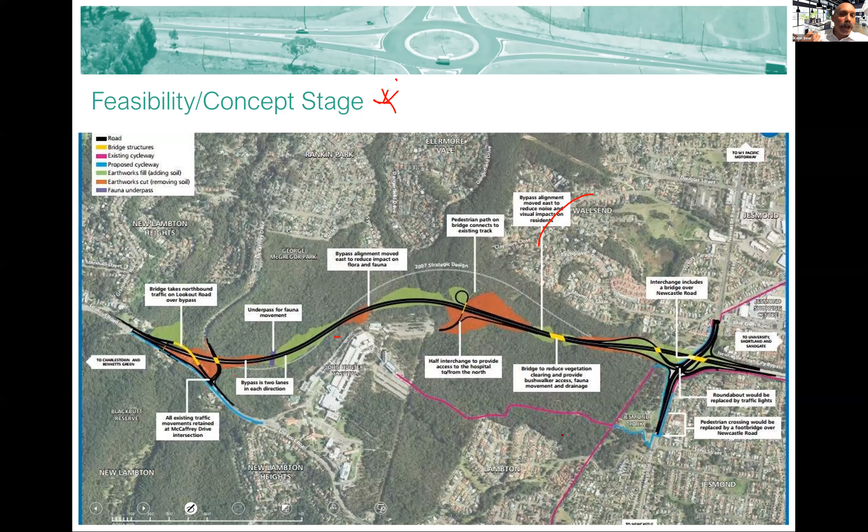Preliminary design stage audits, you're getting now into more detail. It might be on an aerial base, it might be on a survey base, and you're getting some idea of what's happening, and you're trying to identify issues associated with that.

The detailed design stage road safety audit - this is the big one, and this is where I do really think road safety audits are the right tool. So a safe system assessment at this stage often is just not the right tool to use. Road safety audit's great here, and you get into the nitty gritty.

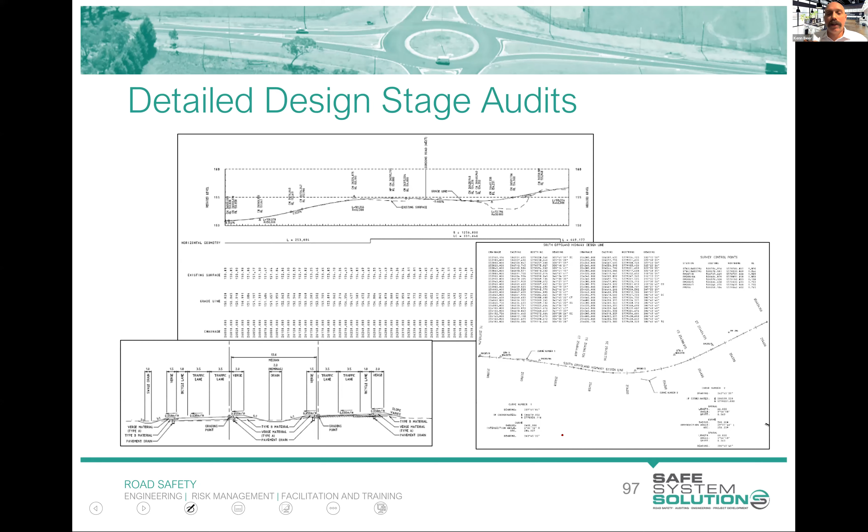You get the long sections, you get the cross sections, the full works, the drainage plans, the paper plans, the lighting, signage, and you've got to go through each of these. You're going through sometimes 400 pages of A3s and looking through everything and trying to pick issues, trying to understand if they build it exactly as they've designed it here, what are going to be some of the issues.

They take a long time, design road safety audits. And if you're not somebody who spends their life looking at these sorts of things or doesn't have a huge amount of experience with this, just make sure you're part of a team that has people who do. That doesn't mean you won't add value to the audit. You need to have people who understand these detailed design documents. You're picking up very intricate things.

The use of drivable culvert end walls, for example - it's pretty easy for an auditor to pick up something like a wing wall that is going to be unprotected like this, but to be able to clarify the difference between different types: the one that is designed for being struck parallel to the road, or where the drain is running parallel to the road as opposed to perpendicular to the road. They're different types of drivable culvert end walls, and ensuring they're getting the right type in the right spot is important. When they get out there to construct, they're just going to build what the plan says, and they may not understand the refined difference between these two.

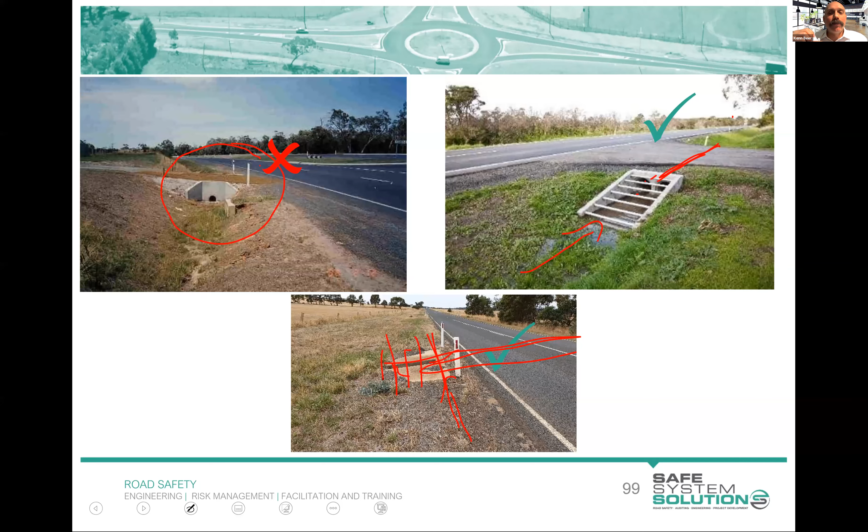I talked about that construction stage road safety audit, and this is something that I don't do too many of, but they are very important for these very complex, large traffic management construction site schemes, to ensure that we're thinking broadly.

These are ones where people get very fixated only on standards and guidelines. Is it the right sign in the right location with the right taper? Important stuff. But who's doing the holistic thinking about, well, now we're blocking off the access to the KFC. How are people going to get to that KFC? And are you going to drive into dangerous areas, make dangerous U-turns because they need their chicken?

And what's going to happen? Have we thought about pedestrians? Can they walk safely through here? Cyclists, motorcyclists, it's a holistic check.

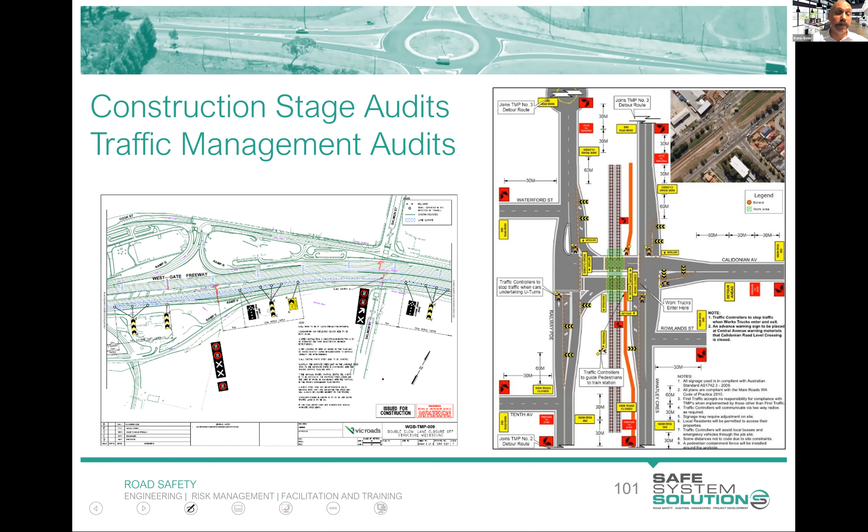I don't think that a full-blown road safety audit is required on minor traffic management schemes. I mean, that's picked up by the surveillance officer, the engineer, or the like. The major schemes, though, they do really need some dedicated thinking around this.

Pre-opening audit is basically just before the ribbon's cut on a big new project, and just a check that everything was installed right. There's no new issues that have occurred, things that weren't foreseen in the design.

Checking things like raised reflective pavement markers. Did they use the right colours? The guideposts the right way around? Have they got the overlap on the barriers correct? Did they put the end terminal in right? Is the barrier at the right height?

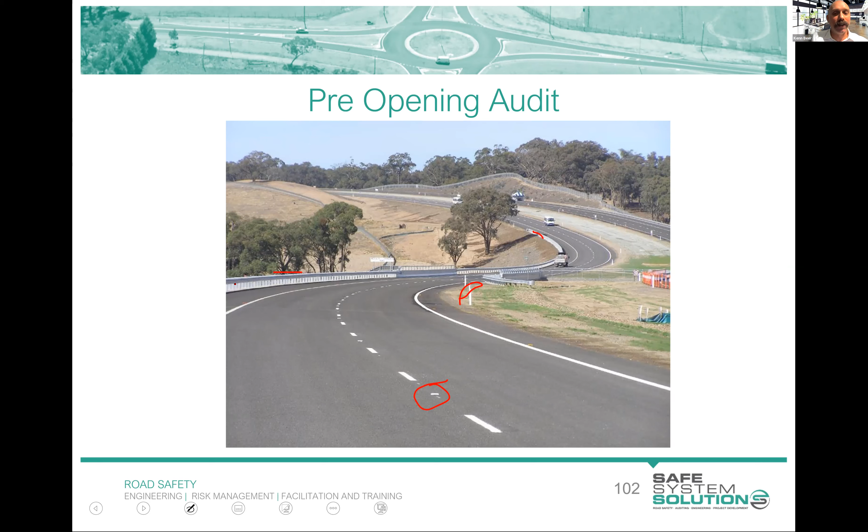Real installation style checks, which a surveillance officer or project manager is probably going to have done a lot of this anyway, but you're, as an auditor, that final set of eyes.

These are the kind of things you want to pick up as the post-opening road safety audit, to ensure that everything got put in right. There weren't any last-minute stuff ups like this.

And a colleague of mine held the opening of Eastlink in Victoria, the 5 billion dollar, whatever, huge project, because they'd basically done this on the exit, a double lane exit, and they put a straight and a straight-left as well, and they'd line marked it like that. And of course, this one should have been just a dedicated left. So the minister was not allowed to cut the ribbon. Oh well, that was the advice.

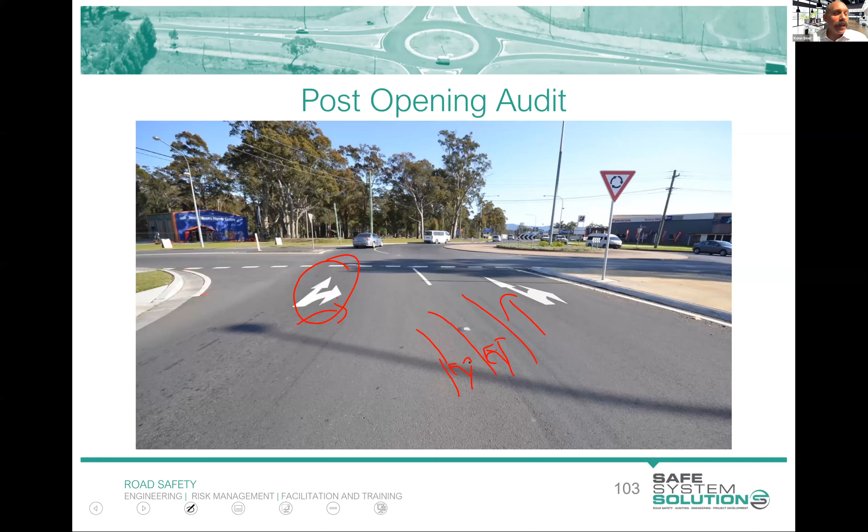This is going to be very bad if you open the road like this. Never seen a line marking crew work that quickly, was the comment from my colleague.

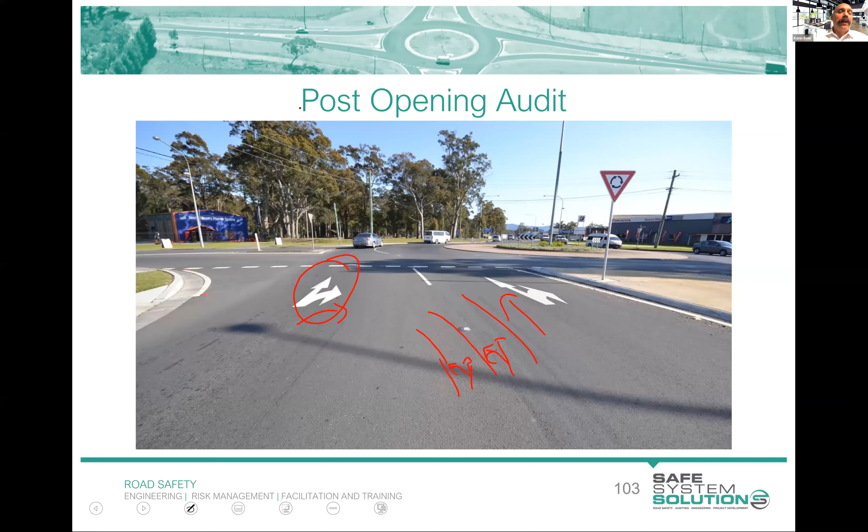There are these things called thematic road safety audits, and this is where you take a particular lens. So it could be a motorcycle road safety audit, it could be a walking pedestrian audit, could be a cyclist audit. Now, what you're doing is you're putting that particular lens on. You need a rider, or you need to ride the route, walk the route, cycle the route. You really think about it from that road user's perspective. I do like to say that you should consider everybody, even when you're doing these, all road users, but these are really just honed in on, focused on that.

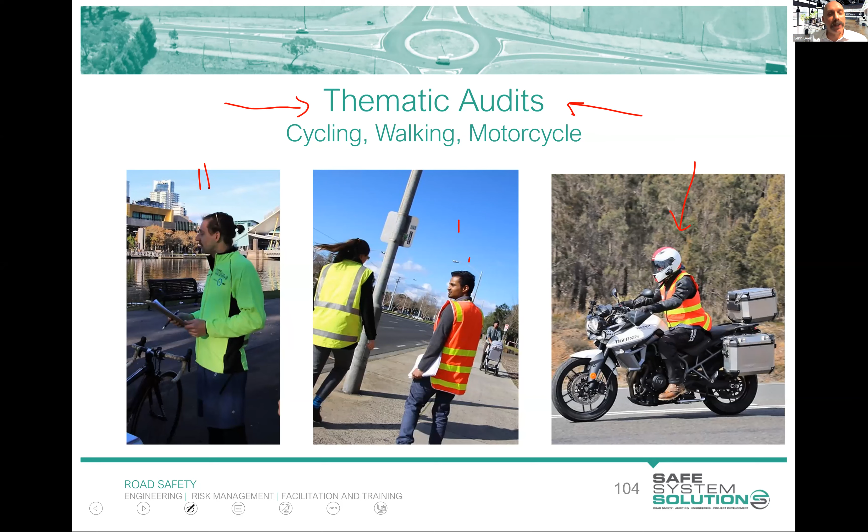But if you happen to be asked in a quiz whether you consider all road users, you consider all road users in road safety audits.

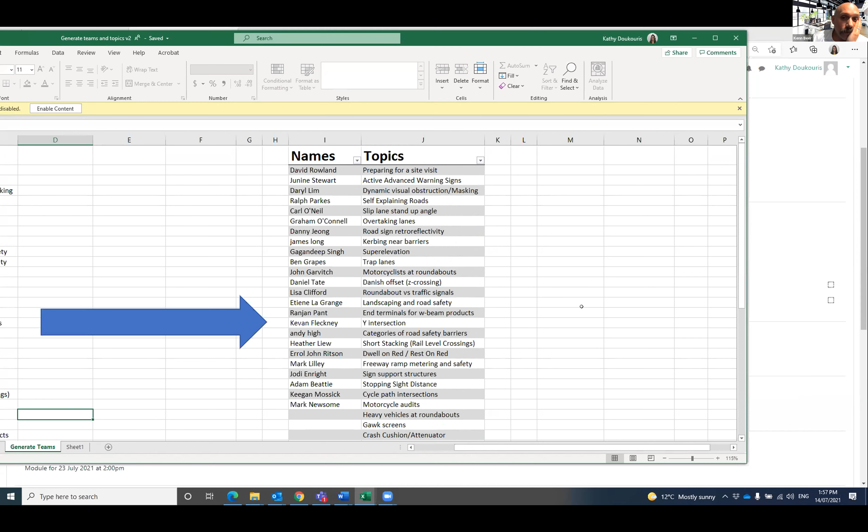You have to say stop, Ken. Oh, stop. Okay, so there we go. Now Kathy, make sure you take a snip of that so we don't lose it.

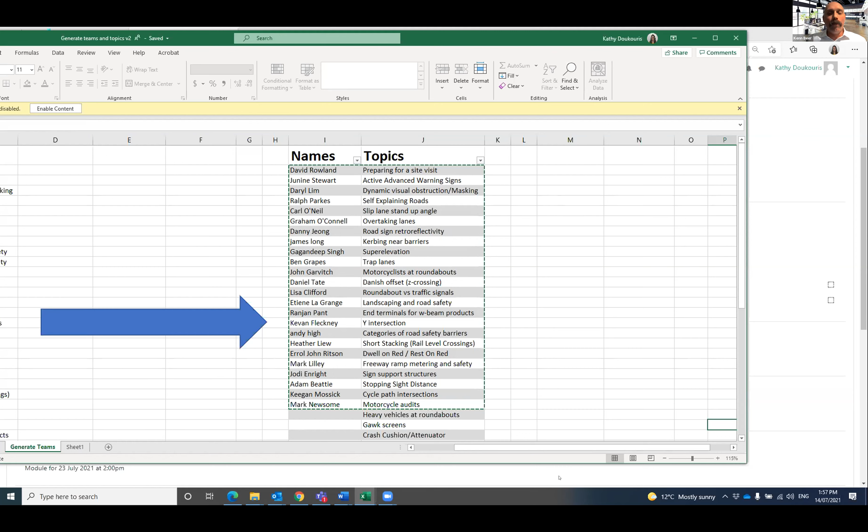Preparing for site visit, active advanced warning signs, dynamic visual obstruction. Oh, Daryl's lucky there, we've already covered a little bit of that. Self-explaining roads, slip lane stand-up angles - Carl, you'll be all over that one. Graham, overtaking lane. Now I'm not going to go through them all, but they're all interesting, fascinating topics.

We are going to share these with everybody so people can have an entertaining insight into this. Think about how you're going to present some key information, relate it back to road safety, relate it back to what you, as an auditor, might be looking for, and upload it to Moodle, in that section.

So you can create anything that you like, and you can jump in there and have a look at the video that was created before. As Ken said, we will share them with everyone. The idea is that you learn from each other, and we don't want you to spend too long on this - some people can spend days researching it. So if you do get stuck, do get in touch with us.